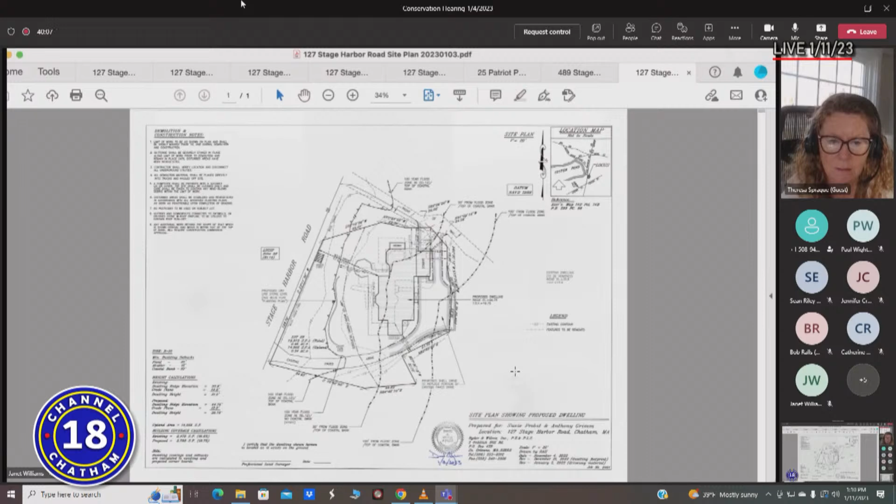I see that Theresa's there as well. Was the tree protection plan there before, or am I just not remembering it? No, I think that was recently submitted with the revised plan from Theresa. Okay. All right, correct. And unfortunately, I didn't make a copy of that, but you should have it. Yeah, we have it. It's in our stuff. All right, anybody have...

I'm just curious, Russ, I was looking to see where the shrinkage in the footprint of the house happens. When you look at the plan, you see where the areaway is on the north side of the house and the bay window or the angled portion. Oh, the cutoff there, yep. It extended towards Stage Harbor about 3 more feet originally. So they took 3 feet off of that and reduced that wall. So the north face wall was reduced by about 3 feet.

What's an areaway, by the way? Areaway. Yeah, it's just probably a concrete foundation, 8-inch wall that's going to have windows. So there'll be windows down there for either egress or for letting light into the basement. Okay. Well, I don't see any hands up right now. Are there any, all right. You want to ask about that?

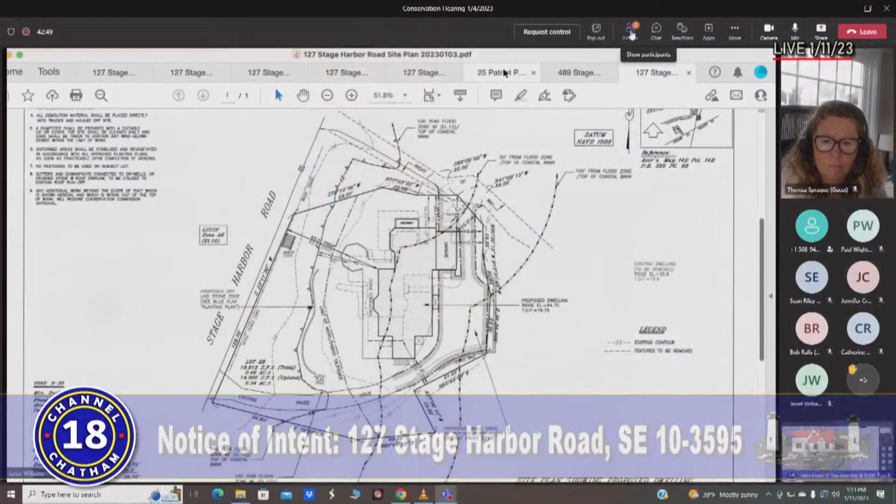My recollection is that their concerns are about the driveway. Yes. So if there are changes there, it wouldn't affect too much of what we are dealing with here today. No, some of the suggestions, for instance, he suggested moving the garage to the south of the building, which wouldn't be very practical. And then moving the whole dwelling to the south, and in so doing, purchasing or doing a land swap so that it would conform to setback regulations. And again, that's something that's a little bit extreme, but should be discussed, I guess. Okay, well, actually, we have a hand up, I'm assuming, from an abutter. So go ahead, Mr. Preston, you want to?

Can you hear me? Yes. Okay, thank you. Good afternoon.

My name is David Preston. I'm an abutter at 117 Stage Harbor Road, where I've been for almost 40 years. The properties at 115, 117, 125, and 127 are really a neighborhood, and it is worthwhile looking at projects on individual properties from a neighborhood perspective. We are a neighborhood because of a number of inescapable characteristics.

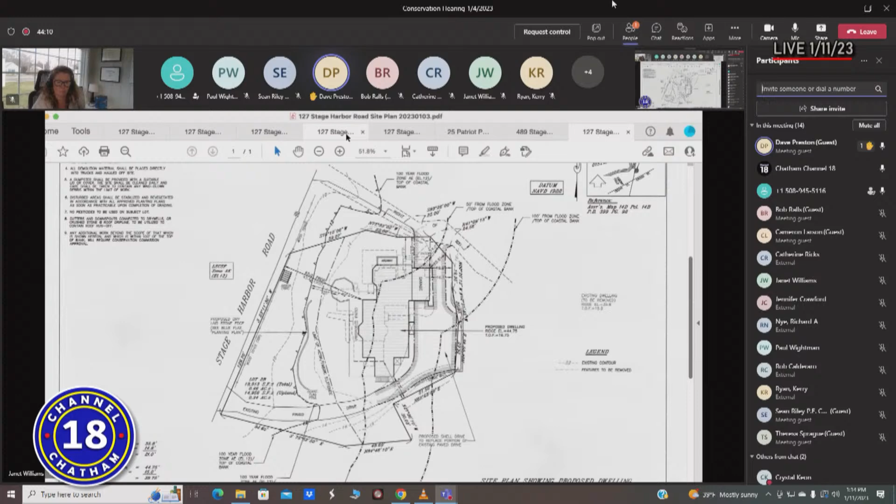The first is closeness. The four properties are on what is a relatively small piece of land, if any of you have been there. 115 and 127, for example, are less than 30 feet apart, with a roadway in between. The second characteristic has to do with the linden trees. Each property has one, and they give the community a special look that we all value. We at 115 and 117 have yearly care routines to keep them healthy and looking attractive.

A couple of years ago, we spent 18 grand ensuring that the big one beside the right-of-way on the property would survive. The third item that links us together is the right-of-way. That is the only way that three of the abutters can access the property or walk to the beach. The property at 127, in addition to the use of the right-of-way, has access to Stage Harbor Road by its own driveway and to the beach at present via the pathway under the arbor.

With that background, let me get to my question. I think you see that we are neighbors, not really by choice, but also by necessity. With the 127 Stage Harbor project, the new house is situated about 4 feet to the south of the old one. And as abutters at 115 and 117, we do appreciate that very much.

Given the space to the south on the 127 Stage Harbor property, would moving the house a few feet more to the south be something in terms of protecting the root system of the trees? It also would add to the privacy of the property of 115 and even to the property at 127 vis-a-vis the right-of-way. That is my question. Thank you. Thank you, Mr. Preston.

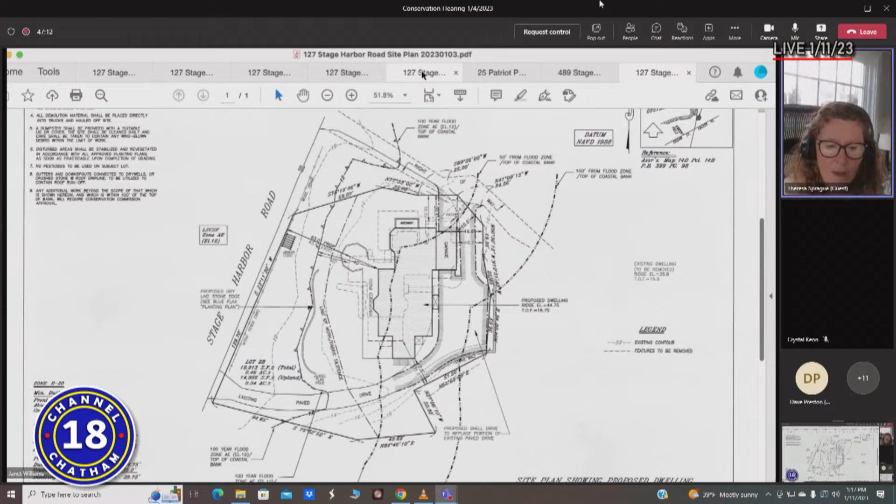Thank you. Through the chair, Theresa Sprague with Blue Flax Design. We did submit an extensive tree protection plan along with the updated planting plan, which shows the permeable driveway. I just want to reiterate what I stated at the first hearing. Our first direction from the property owners was to protect that linden tree and the English elm trees that are located along Stage Harbor Road. We all recognize the significance of these trees and the importance of the character of the neighborhood

that these trees support. With that, we've submitted an extensive management plan to protect that linden tree, both short-term during construction and long-term. And I know that the property owners are committed to that plan. In addition, moving that north wall 3 feet further to the south obviously helps us better protect that linden tree. The existing structure is virtually right up against that tree with existing brick patio over that root system.

As part of our tree protection plan, which was created by a certified arborist, we're proposing to leave that brick patio in place while the construction begins, and then to hand remove that existing brick patio after, and then support the health of that tree through protective pruning, through monitoring, through irrigation, et cetera. So that tree protection plan is available, and we'd be happy to share that with any of the abutters. And I believe it is on MyTownGov. Yes, it is as well. It should be, so anyone can download it and take a look at it. Yes.

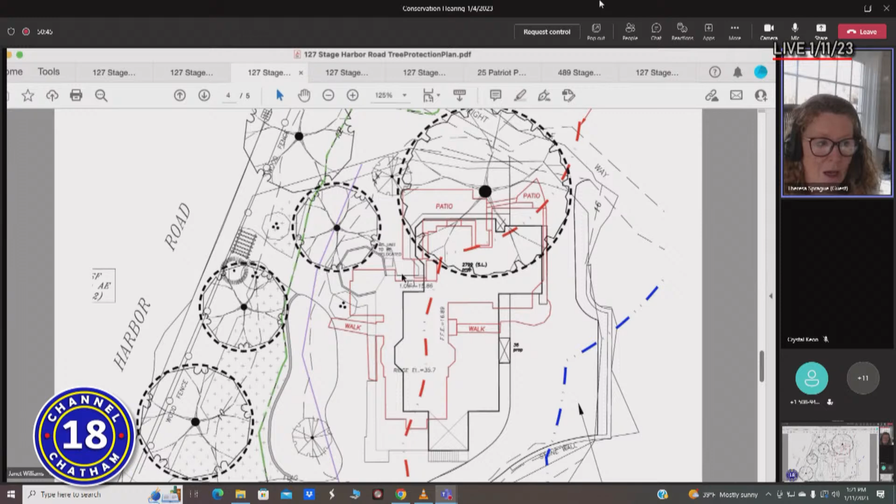We've provided 3 different options for protecting the tree during construction, and obviously we would want to consult with the contractor to use the method that's going to best protect the tree with the methodology for deconstruction. So we're hoping that this tree protection plan will become part of the order of conditions, and that we'll have an opportunity to work directly with the contractor to make sure that tree is protected. In addition, we've provided pre-construction, construction, and post-construction guidelines for protecting the tree. Thank you.

So as I've read your tree protection plan, the idea is that you would have someone there, yourself or a representative, often during the deconstruction and construction. Exactly, through the entire process, from pre-construction through post-construction. Right. Yes. So, Mr. Preston, do you have other comments, questions? I will assume no. Okay. Other questions from anyone? I mean, this is certainly one of the more detailed tree protection plans. Yes, I did have one final. Okay, go ahead.

It had to do with the arbor and the path under the arbor. The arbor, while not always in great condition, is somewhat attractive. And as you look at the property as a whole, it is very consistent with Chatham streetscape. The loss of the path also puts more pressure on the right-of-way for beach access. Why does the arbor have to go as opposed to remaining as a nice and attractive piece of our Chatham heritage? Retaining the path keeps the families who rent the property at 127 off the right-of-way, where they sometimes get into trouble with traffic.

So again, I can answer that. The existing path is to be maintained. The arbor is in poor condition, as you pointed out, and so that's why we're proposing to remove it. The property owners are trying to minimize the amount of maintenance required on the site, so they did not ask us to put an arbor back. Certainly that's something we could discuss with them, but we're simply proposing to remove that arbor because it's in very poor condition. It can't be maintained.

A new arbor would have to be constructed. And the homeowners were considering whether to put an arbor back. They were thinking about the maintenance required to take care of it and make sure it doesn't get into the condition the existing arbor is in, but that path is being maintained. So it will just be a grass path that will lead them out to Stage Harbor Road and then across to the beach. Thank you. Thank you.

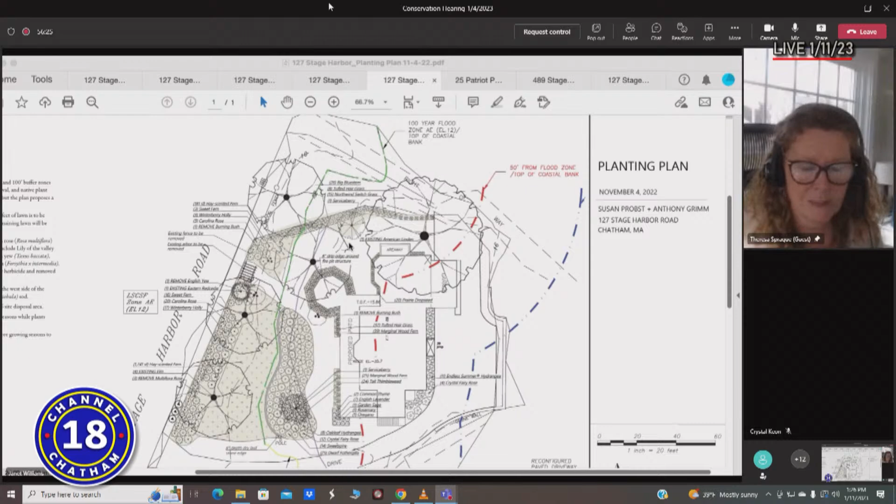Anyone else? Okay, it sounds like not. So, it sounds to me like we don't have any significant issues with the plan as proposed. You still have to go to the zoning. It sounds like you still may have a conversation with the abutters for some change, which will be handled through zoning, probably. Right, right. So, do they have to come back if the house is moved 2 feet?

I don't know. I mean, if you did move the house some small distance, I guess, up to 2 feet, it strikes me that the overall mitigation plan wouldn't change much. No. You decrease the 0 to 50 by a small amount, but the mitigation being proposed remains the same. Right. So any changes therein could be reflected to us in just an updated planting plan, I guess, site plan. Insignificant, yes. It wouldn't necessarily affect what we would then write an order for.

And one of the issues, not only due to the setback, but one of the issues about moving the house to the south is you have an existing driveway that in that area closest to the house will probably maintain pretty much the same configuration, because across the other side of the driveway is a retaining wall that's going to remain. So we can't narrow the driveway necessarily. So chances of it moving are somewhat small in your view? Yes, I would think. Just through the constraints. Okay. Is there any reason, anybody have a reason for us not to send this to an order as proposed? All right.

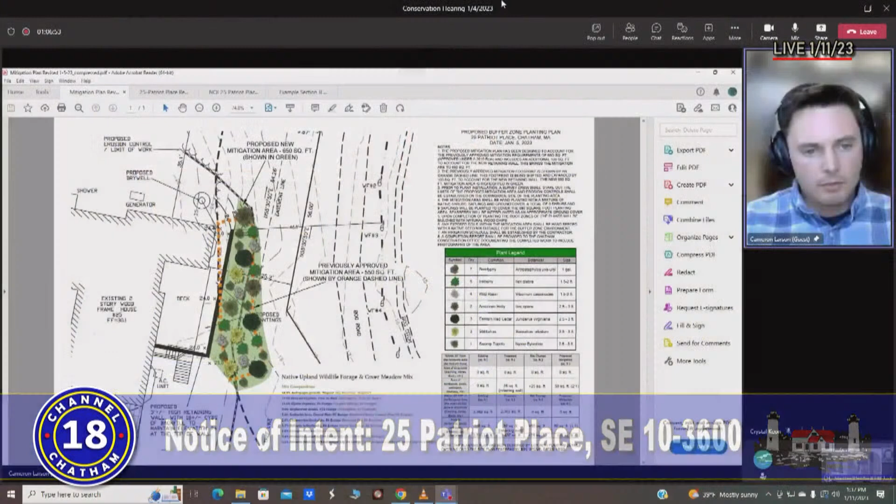All right, so that planting plan should be back up. So that entire green highlighted area is the proposed mitigation area. It's 650 square feet. And what you're seeing over here is the plant legend that indicates a mix of native shrubs and saplings. So we have 6, 7, 8, 9 saplings and 9 shrubs, and then 7 bearberries to also go in to improve the herbaceous layer.

So beside the swamp tupelo that's outside on the south part, outside the orange dotted line, what else did you add besides grass to make it 100 square feet of mitigation? We added 3 additional saplings and 3 additional shrubs from what was previously approved. This plan is just a depiction. The way the plants are laid out is kind of just in a random fashion on the plan. It doesn't reflect exactly what was added in certain areas beyond that orange. But we did increase it by 3 shrubs and 3 saplings to account for the 100 square feet.

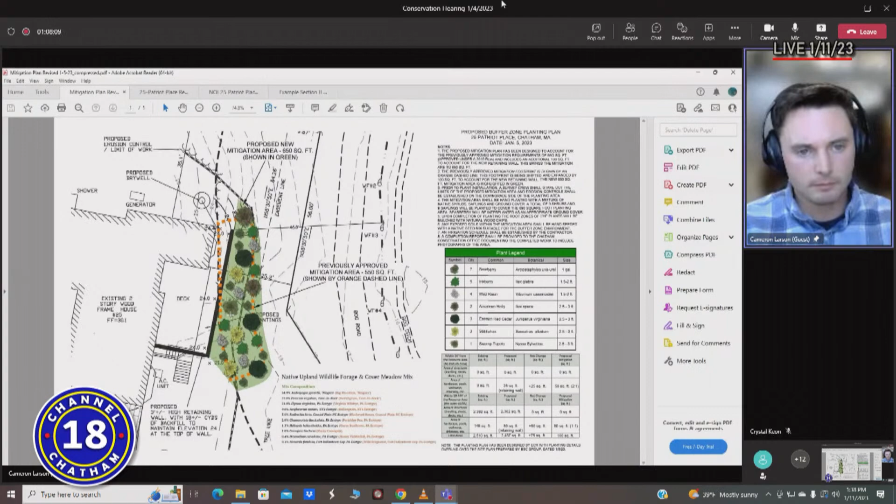Okay, and then on the plan, inside the retaining wall on the side of the deck, last time we were talking about, you said it's supposed to be sort of a walkway, but there's also proposed plantings. Can you address that? Yeah, you can see it a little bit better here. So that's just a notation. The applicant wanted to have the ability to add some native plantings along the top of the wall if they'd like. I do know what you're saying. It's a narrow area, so they're going to have to leave enough room for walking by there. So it was just something we wanted to cover in this application if they wanted to pursue any plantings in that area.

But that's aside from the mitigation. That's not included in our mitigation calculations. And at that time, if they want to, they'll come to the commission and tell them what they want to add? How we basically spelled it out in the narrative part of the application was that there'll be native plantings in that area that will be pulled from the town's approved list. If you need additional approval beyond that, we can certainly give you notification or send you the exact plants that are going to be there. But again, they more or less just wanted the ability to add some native plantings there if they so wanted to.

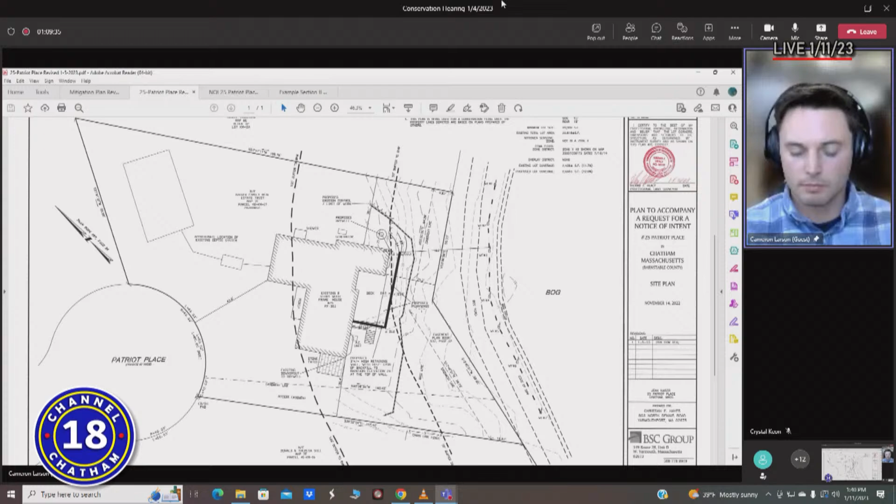I guess I leave that up to the whole group. Is that something that would need approval at that time? If they decide they want to put in native plantings on top of the wall, wouldn't they need to come see the commission? They could probably notify the agent. You can put in the order that any ornamental plants that are installed are native and approved by the agent. Yeah, we can add a condition. I just wanted to make sure that we handle it through the agent. Yep, that's not a problem. We can certainly notify the agent of the plants that are going in.

Okay, thank you. Anyone else? Just got a quick something. So the bare areas on that slope will be planted, correct? And mulch? Correct. Okay, that's all I had, thanks. Okay. Sounds like that's it.

You probably want to go to the next earliest work session, don't you? Ideally, yeah. I thought so. Rhetorical question. We're going to have to cut it off at some point. This will put us to 11. That's a lot. So you may be the last one in. Everybody else can sort of prepare their arguments. All right, we appreciate that.

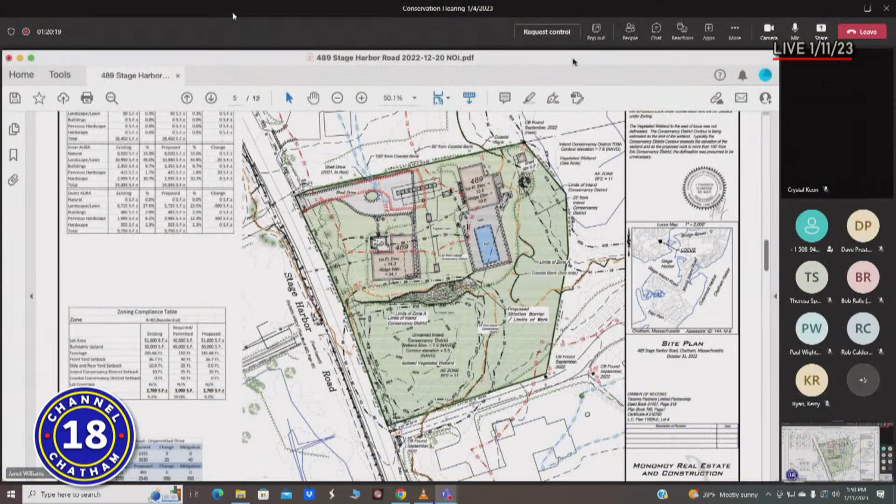Anyone else here? There's 2 mitigation areas, right? Isn't there a little one up at the top? Yes, out in the back corner by the shed. Is there a reason for that? It was just a good spot for it. Okay. Out in the wetland, down the big one on the south, there are green stakes out in the middle of it. Is that part of the delineation of the wetland, that's what that was? I believe so. Okay. Typically, those green stakes we're seeing as mitigation delineations, but I was a little confused there.

One thing that has occurred to me when we talk about mitigation areas that are adjacent to what I call a tsunami of invasives, or sea of invasives, is whether or not the mitigation plants would be better off being trees. Because the invasives have a harder time covering up a tree than they do a shrub. Until you get into porcelainberry and the other climbers that go right up. They go right up, but all you have to do is go there with your clippers and you kill it. And it doesn't require a lot of muscle power to take care of invasives in a tree if you stay on it.

Now, there were 3 trees out there that will remain, that they had planted at one point in time. Yeah, the 3 birches. And I do see, I think you're planting, let me just take a look, there's a black oak that's in the area by the shed. Yeah, you're planting one tree, basically. Yes. So that was the only thing that occurred to me, and this is actually sort of a new thought for me, because we get this all the time now, where we're next to all these invasives. What can we do besides a mow strip? I personally don't have a lot of faith in mow strips.

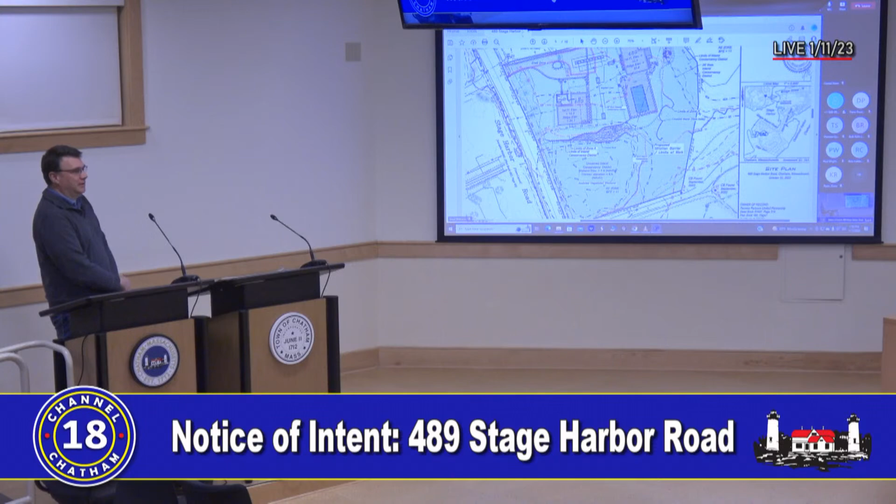There are the 3 trees that exist here, and it does no benefit to plant trees too close to each other. I agree. All right. So this is just something I'm sort of tossing out there for future reference, but I'm going to be bringing this up in other similar cases. In this particular case, I accept your argument. Anything else for me or anybody else?

So we need to send this to order conditions before he changes his mind and wants to go to January 25th. I'm sorry, did you say go to January? No, February. February would be great, because then they can get in there in March and start the planting. It works out well for you and us. All right. February 22nd, okay.

I'll make a motion that we continue 489 Stage Harbor Road to the work session on February 22nd, 2023, for an order of conditions. Second. Roll call vote, Bob. Aye. Janet. Aye. Karen. Aye. Lise. Aye. Cheryl. Aye. And I vote aye. Thank you, Thad.

Very good. Oh, boy, okay. Yeah, fun.

Up next, Mr. Chairman, is 299 Cranberry Lane, Timothy F. Ryan, map 15K, parcel 7-7, SE number 10-3594. Project is redevelopment of property, new house, guest house, septic, sports court, and land management plan. You again. Alrighty, me again.

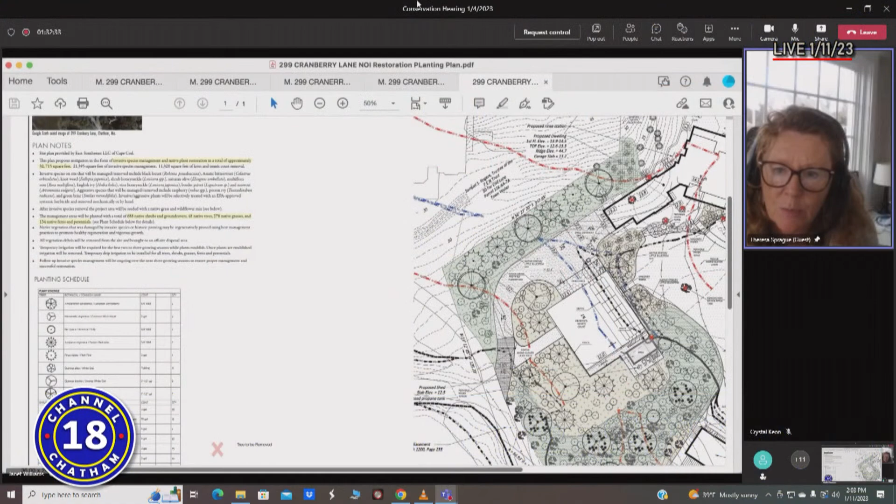Yeah, there's a lot to like about the project, obviously. There's a tremendous amount of mitigation going in. At the site visit, Theresa, you were up there with tape because you realized some additional trees had to come out relative to the plan we're looking at. I believe there was one tree that was not shown on the site plan that I marked. The other tape was on trees that are already marked for removal on the site plan that I just flagged to make it clear at the site visit, the exact trees they were.

So there were the 2 cedar trees, an oak tree, and a pitch pine in the layout of the garage. And I think there was one tree in the area where the driveway wall may go that was questionable. It's not shown on the site plan, and I believe I flagged it, but the flagging was done on trees that are already marked for removal. Right. So do we need an updated site plan showing where the actual retaining wall will be going in? Or is this accurate?

That's accurate. I just want to double check that we've located the trees in question, both the trees on what I call the back end of the bank, as well as this retaining wall, because when we were there, it wasn't obvious to some of us. We were trying to follow on the plan where that retaining wall went, and we just weren't really following it. So I didn't know if that meant it wasn't completely laid out on the plan or not. Oh, it was, we just didn't get the points to the crew to stake it. It just wasn't staked enough. Okay, so we couldn't see it that way.

The only thing that is an issue for me is that you are cutting into what is essentially pretty pristine, tell me if I'm wrong, Theresa, habitat on that hill where the retaining wall is going. Anyway, go ahead.

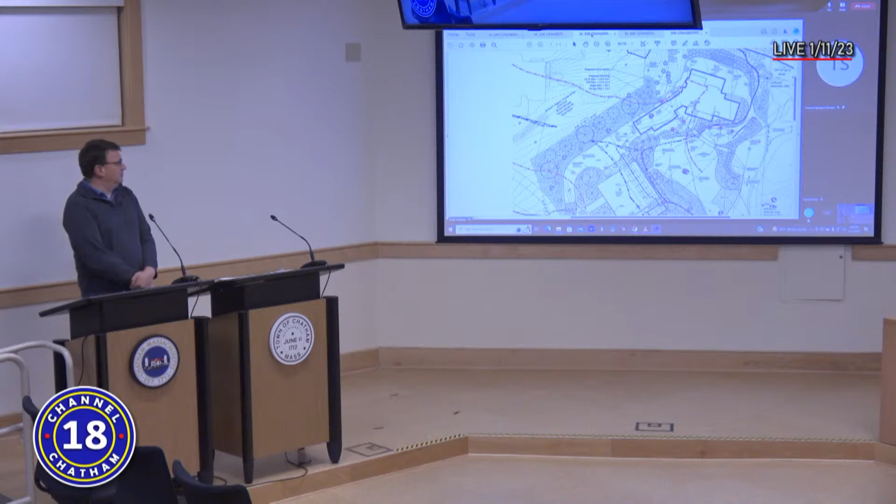Good afternoon, Paul Muldoon, Muldoon Architects. We were fairly strategic on the placement there, knowing that we're cutting into that bank a little bit and utilizing the foundation wall of the structure to support some of that grade. That swath between the 50s there was strategic. We're trying to place it in that area where we're between the 50 and the 100, of course steering clear of the floodplain.

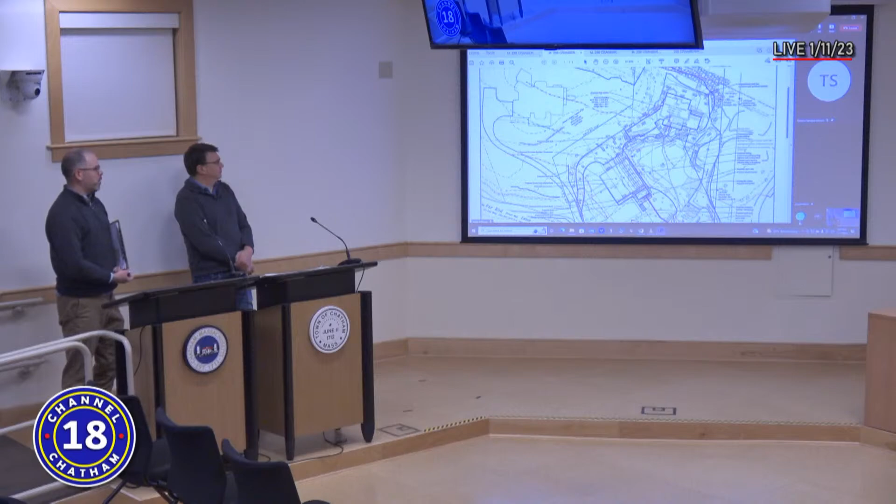Can we push it further south? To some degree, yes. There's no reason why we can't. Substantial movement means substantial change. If we said 18 inches, is that substantial enough? I don't know. 36 inches? I'd have to go back out there and stare at it with that in mind, but, as I said, it appears to be pristine habitat. I don't know how much you could move it in order for me not to feel queasy about it, but any amount you could do, obviously, is to the good. Sure. How important it is, I'll let my colleagues opine on that.

But overall, the rest of the project, and this is another one of those projects where not that much mitigation is required. A lot is being offered. That's understood, appreciated, and so there's not a lot we can whine about with that in perspective. But I am going to whine about that particular thing. So other than that, and I'll let others here tell me whether or not I'm just whining for no good reason. And that's really my only remaining concern. Anybody have any thoughts on that? Rush, go ahead. Okay. You'll bite? I'll join you in

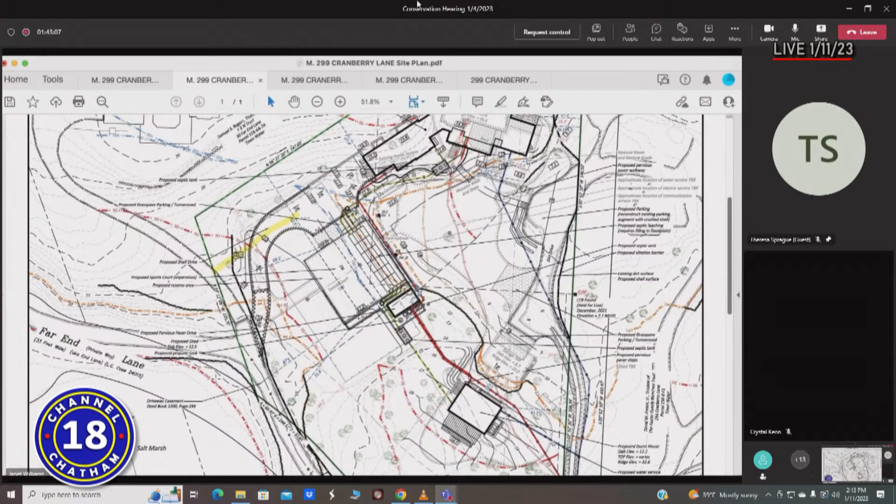So while the neighbor has an easement over the subject property, the Ryans do not have an easement over the neighbor's property. So we couldn't make it all the way up to here to get back to there. So it's coming in from their property. Where's the property line? The property line is in green here. Okay. The road isn't necessarily within the road layout. If you were to scroll down a bit further, you can see that the dirt road is within the road layout, and then it deviates out of the road layout. Back in the day when they would draw it without knowing where the wetland was exactly.

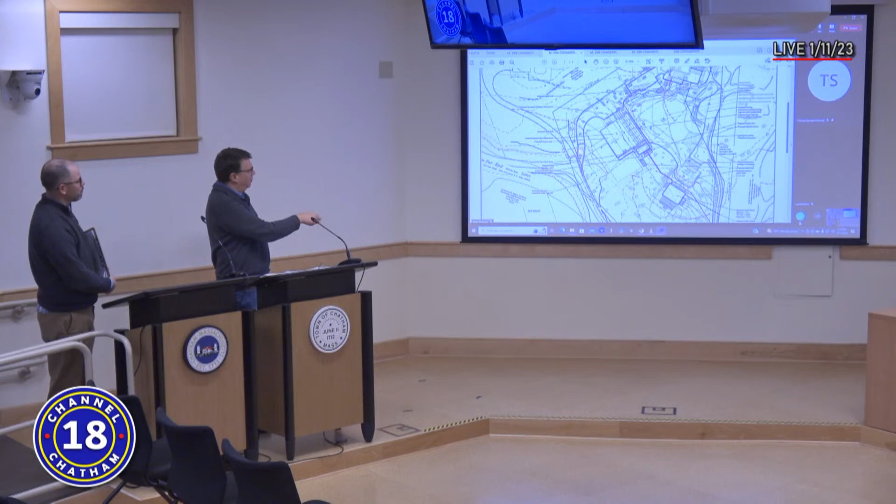But I still am looking at it thinking, within that green property line, you could still start the new driveway further up and reduce the square footage impact. We can certainly review that. I'd want to review that with the neighbor first. There's a change in the material, and we were avoiding intruding upon their space. Okay, I would like to just ask that, because it could cut the impact coverage area significantly if it were shortened up. Sure.

The other thing that struck me about this area, along with the grass pave over here, and a parking area here, is by my count, this area in the new driveway is designed for 5 cars, this is what the narrative says. A quick gauge of the ruler was telling me that the area over here, proposed parking, would hold about 5 cars. These grass paves look like they would hold about 4 or 5 cars. So I'm adding it up and thinking you're providing parking for 15 to 20 cars.

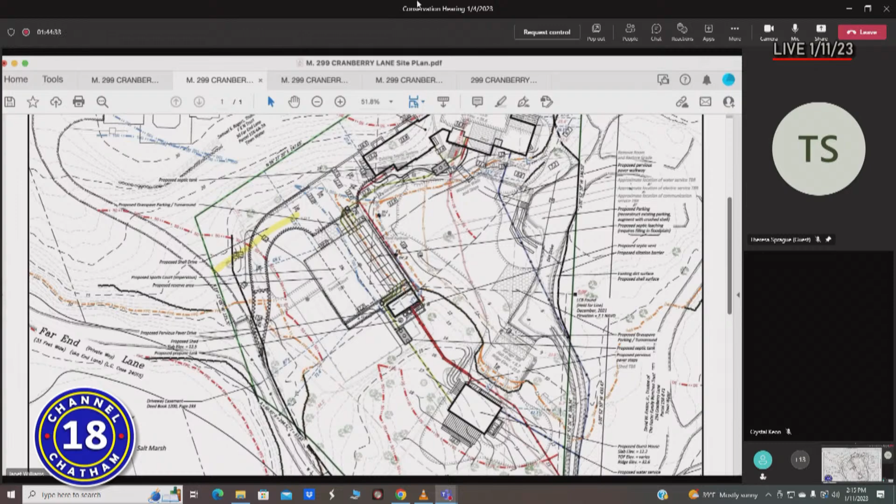Almost. So in order to be able to get through here and turn around, you can really only fit 2 cars in here. And the purpose of the grass pave is to enable larger vehicles to be able to turn around. So it wasn't intended for parking. It says parking though. That's what got my attention, was looking at the number of times the word parking was appearing on the plan. Sure. Parking / turnaround.

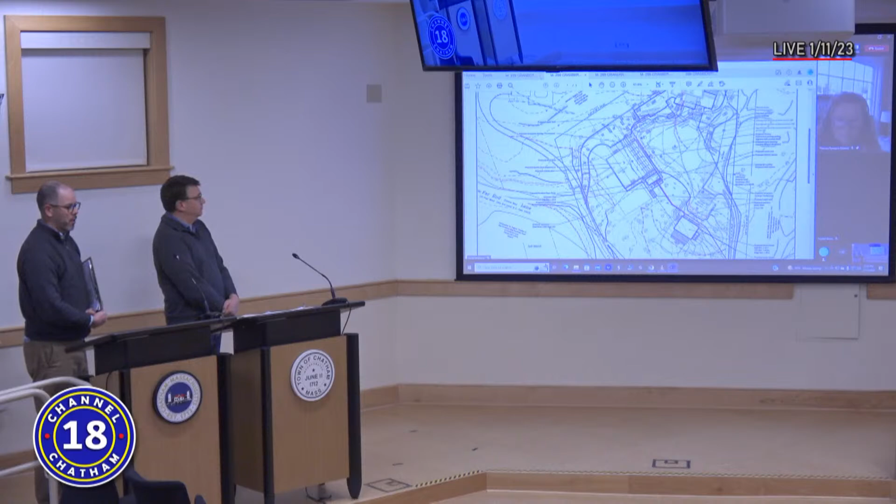The grass pave was also in response to neighborhood discussion about the loop coming down Cranberry and minimizing the opportunity for cars to continue on to the neighboring property and work themselves around. So with this on our property, we can have Amazon trucks and landscape trucks and life safety trucks back into this grass pave and then pull out on the property rather than pull around the bend on the sand. That was a very strategic conversation we had with our abutter there, trying to minimize the activity going up and onto their property.

I appreciate that. I just think that another look at the amount of parking, and maybe not so much the grass pave; the grass pave areas don't bother me. I do understand the need for larger delivery trucks. I think I'm most concerned about the parking off the new driveway.

Maybe some of that can be decreased a bit. Oh, sure. Okay. There's just an awful lot of parking. The area around the new garage, we have a one-bay garage there. Right. So it's one car directly in, needing the space to turn and pull out.

So we're expecting the Ryans, Tim and Carrie, this is their primary residence in the near future. And they'll be parking there, and for 2 cars to be in that area and be able to back out onto that grass pave and pull out onto Far End Lane, that works. If we have 2 more cars in there, it doesn't work, and cars will be backing out onto Far End Lane. So we're trying to reserve enough space for a car in the driveway.

Oh, okay, I'm sorry. I see the grass pave marked here. I guess I was looking at this area where it's bumped out in front of the grass pave, so there's even more. I understand that this design allows for maximum flexibility and usability, but it is within resource areas. Understood. I'm just asking that another look be made to see if some of that can be decreased a bit.

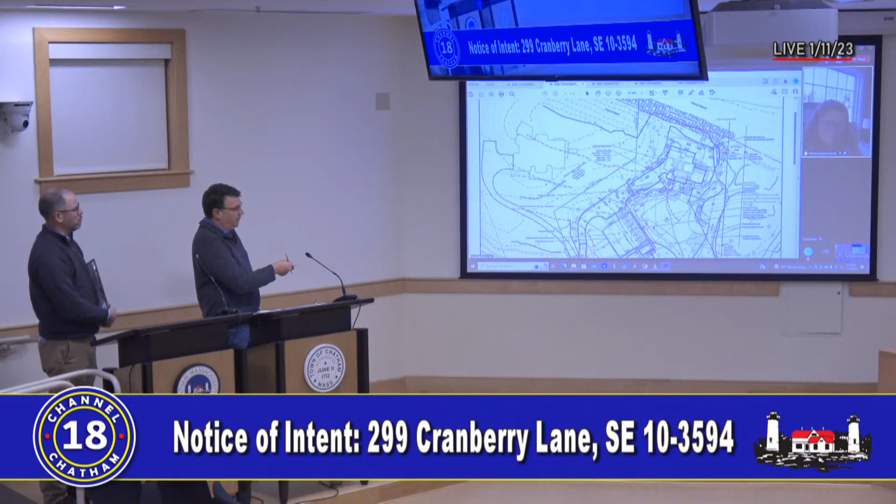I thought when we were out there, we were sort of saying that we believe it used to be almost flat, so that's why I was asking, because below that hill is very flat. So that's why I was asking. Is that it, Karen? Yeah. Okay. Thanks. Theresa, you have your hand up.

Thank you. I just wanted to speak to Janet's statement regarding the parking. This home previously has been a rental. And when I was out there during the summer, what I was witnessing was exactly what we saw when we were all parking on the site for our on-site visit. And that is that cars are parking everywhere. They're currently parking up on the slope to the front lawn. They're parking in multiple different areas.

So I think that this is an improvement in that it really directs where the parking is going to be, where currently everybody's sort of parking willy-nilly, for lack of a better phrase, mainly in the area where we're showing the proposed Grasspave parking turnaround on the eastern side of the driveway near the proposed new garage. Right now, everybody is just kind of pulling in and parking up on that lawn, parking up in other areas.

One of the things we were considering when we proposed the Grasspave is just the fact that this is temporary, so for occasional overflow parking or the need for a larger vehicle to turn around, like a delivery truck, this would provide for that. But it's not long-term or permanent parking where people are regularly parking. So those Grasspave areas would only be used in a situation where perhaps there's a family gathering and extra family members are going to be there. Otherwise, they'll remain as Cape Cod lawn and won't be regularly parked on and used.

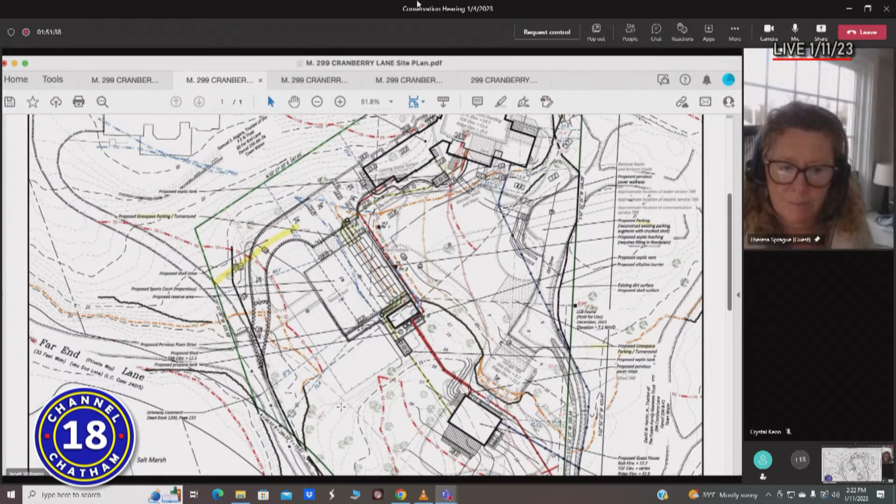So I think this plan actually consolidates the parking, where currently parking on this site has just been wherever somebody can find a spot to pull in, which is what we experienced on Monday. Thanks. I parked there.

All right. Bob Moore, go ahead. Got a few more, Theresa. I know the neighbors were concerned with lighting, and you mentioned that step up to the new court will be lit. Any other areas that will be lit? The other areas that would be lit are just the walkway, so the stairs going up to the main walkway into the house. So we'd want just some footpath lighting, so down-facing lighting just to provide safe access, footpath to walk up the stairs, up the walkway, and then into the patio.

I'll let Paul answer regarding any front entry lighting. We haven't discussed that. Paul may have designed that. I did want to make sure the neighbors understood there would be no uplighting, there will be no floodlighting on this site. Obviously, we know the impact that lighting can have on wildlife. Our goal is to minimize that, but just allow for safe foot access through the walkways and step areas. And that's just low voltage lighting? Is that what that is? Low voltage, yep, exactly. Low voltage foot lighting, yes.

And architecturally on the structure, the garage door, there's a side door next to the garage door, which will have a light over the top. The rest of the lighting will be underneath a covered porch, both on the front entry side as we approach from that walkway. The front entry door is in that nook, so we'll have some lighting underneath that porch and over the door. And then on the north side of the house, the covered porch there will have recessed lighting as well. Okay, so it's not going to be like New York City then, correct? Absolutely not. What about the sports court? Is that going to be lit at all? None, besides walking path lighting at the stairs. Oh.

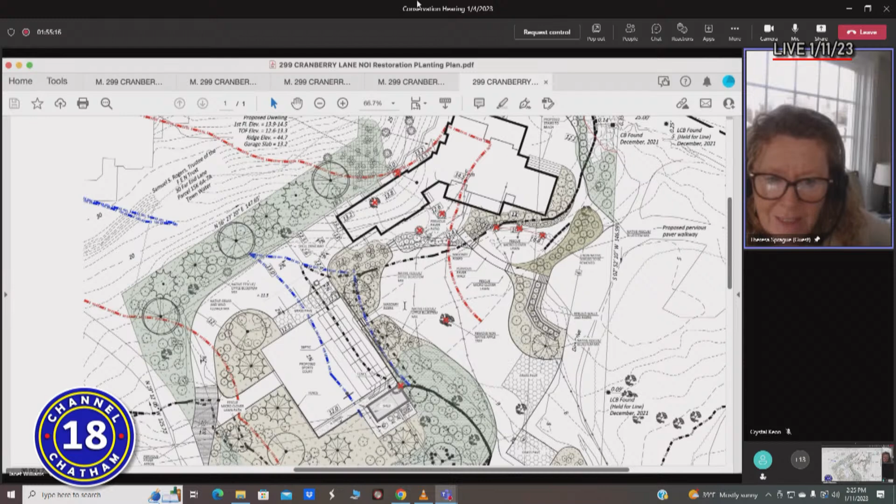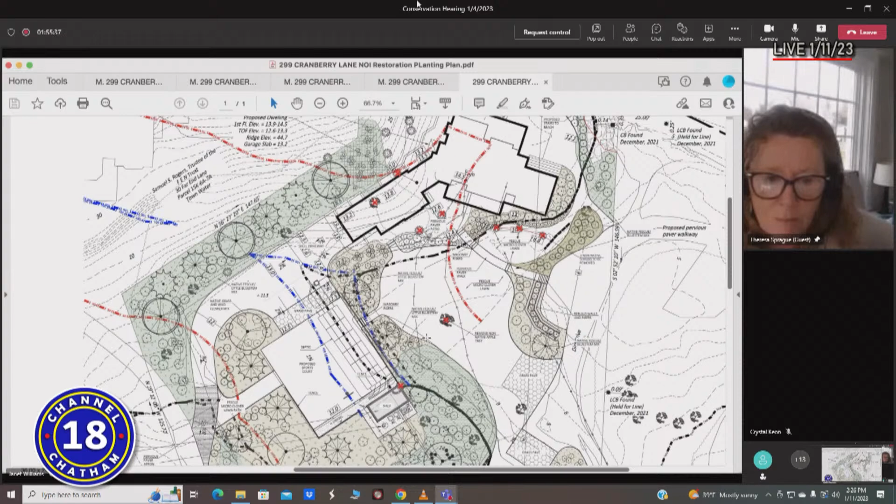But we've got a lot of woody vegetation that's directly abutting that Cape Cod lawn area that's between the sports court and the house. So I don't know that having that low fence will provide any additional protection, keeping mowers out of those areas. It can certainly be done. Maybe it's a belt and suspenders approach, but there's a lot of woody vegetation that's going back, a lot of bayberry, et cetera, that's either going to remain or be replanted. Okay. And we discussed no permanent irrigation again, correct? Correct. The existing irrigation system's coming out, no subsurface irrigation. Correct. Thank you.

Bob? Anyone else? So is it fair to characterize much of what we are talking about in terms of potential changes has to do with the driveway configurations? We'll be discussing that to see if there's anything that is feasible. I don't know what to do about that bank. I would ask you to take a look to see whether it really is just 18 inches or not. Well, if the updated stakes are there, it'll make it more clear in my eyes to see how much we're carving out. Right. And I'll try to get back out there as well, see if I can put my 2 cents in on that.

But anyway, other than that, I think we're making good progress here. Overall, from an environmental perspective, this strikes me as a plus. So we're just talking about the details at this point. Oh, I have a question. I'm Janet, sorry, just something else I noticed on the plan. Why is there a propane tank behind the bicycle shed? That's for the generator. Oh, okay, so the generator is propane. This one is. Okay.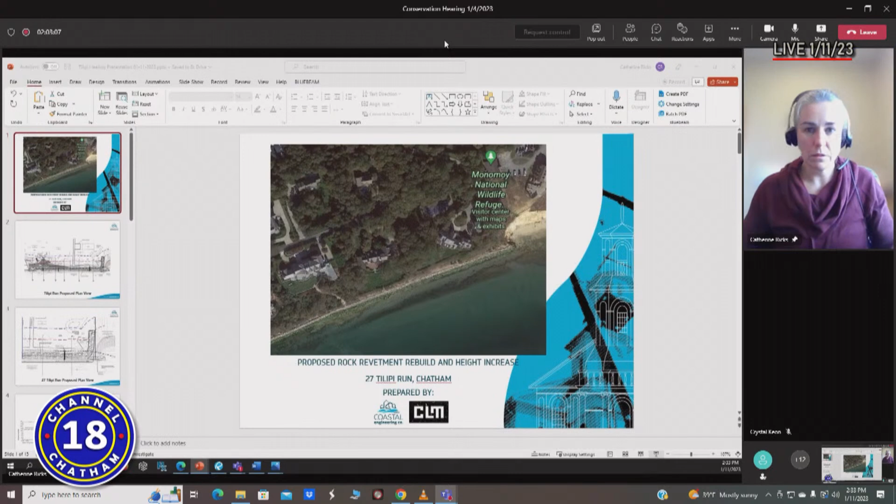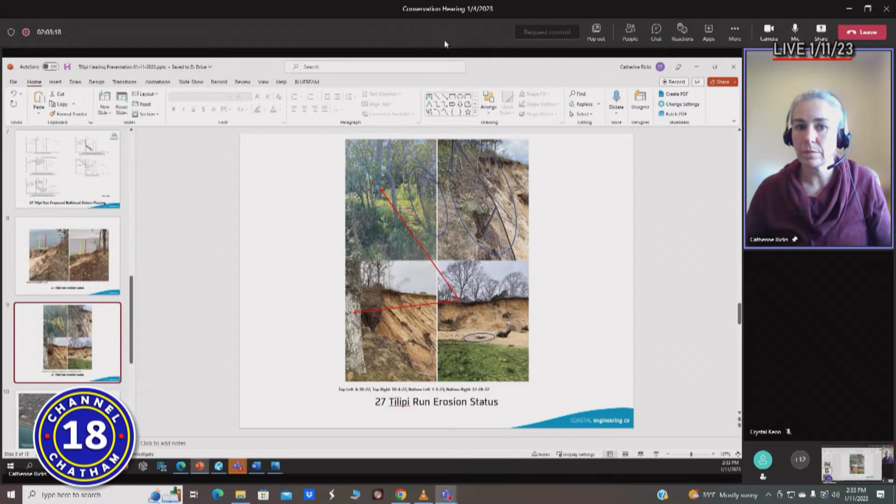Yep. I don't think we're seeing what you think we're seeing. We're seeing a faraway view. The cover page, I guess. Oh, is it not going? Huh, it's showing on my screen. I apologize. Let me see if, okay, I don't know why it did that. You just paged forward. I'll stop sharing then and I'll read. Okay. It actually was showing on my other screen. I apologize. Let's try this. Go back to it. Okay, so now it's showing. When I hit presentation, it didn't present on the correct page. So I'll go back lightly just to show.

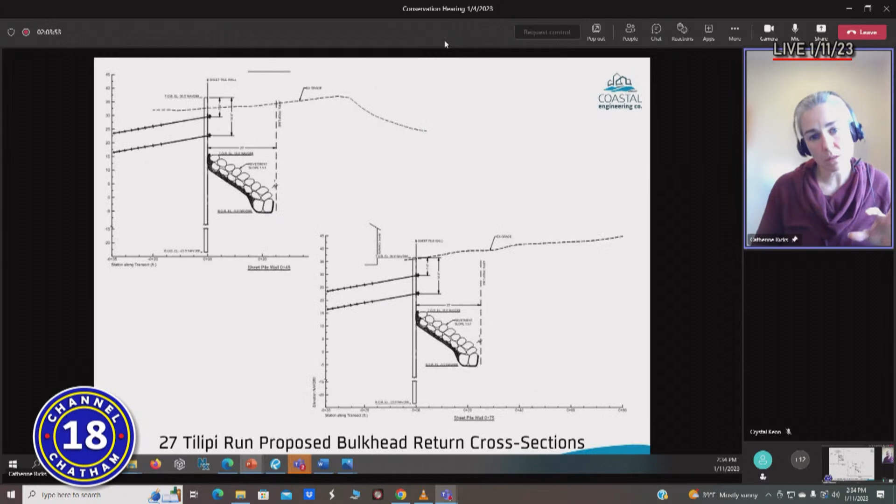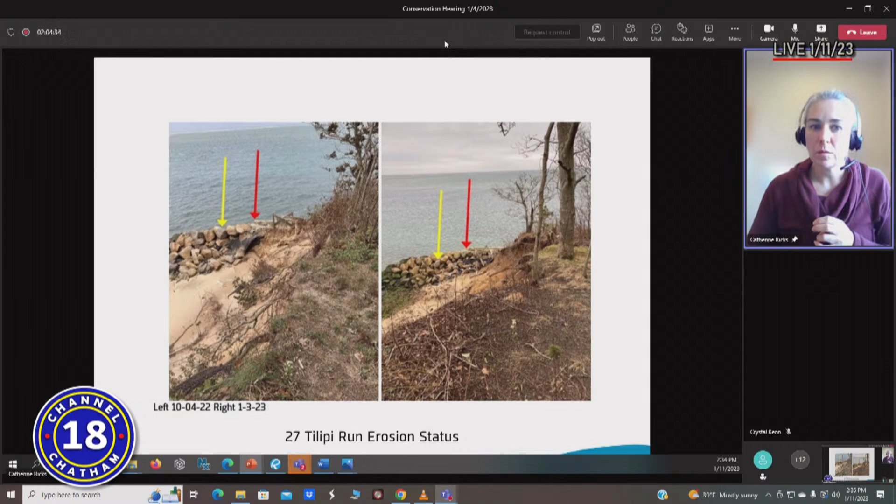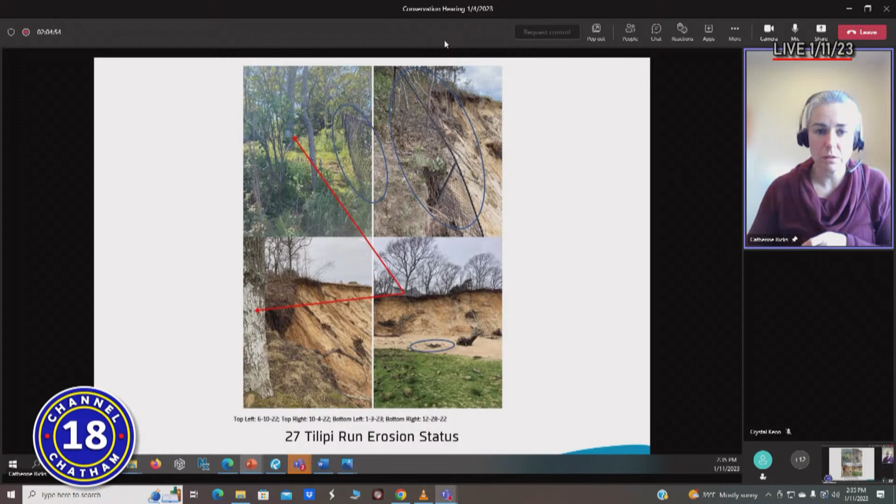And then these are the pictures. So I don't know if you've been out there recently, but the arrows are kind of showing the rocks and how they have fallen behind the revetment, and the timber from the stairs that is now very visible, which back, I think when we went out there maybe last March or April, was definitely covered with the sediment, as part of the bank. And here's where the fence was along the property line, and that tree that I'm pointing out in all 3 of the pictures, and then a portion of the fence I actually saw on the beach at this point. Yeah, so a lot has occurred.

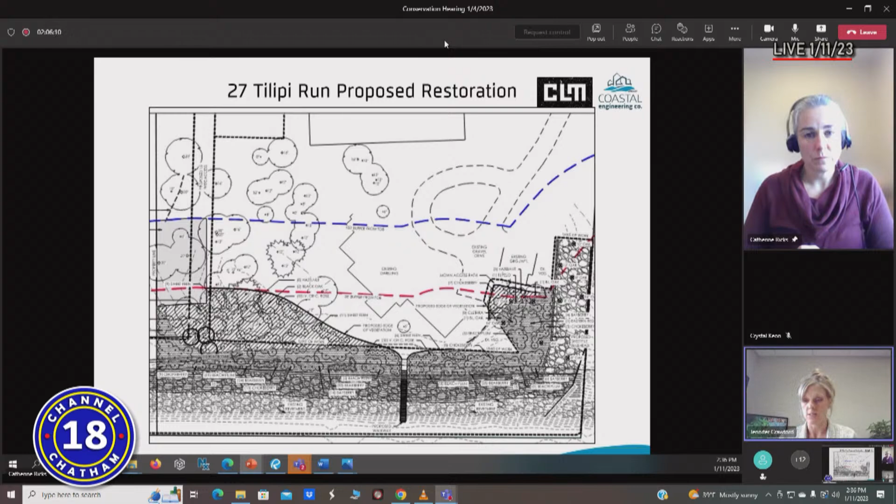Good afternoon, everyone. For the record, Jen Crawford from Crawford Land Management. So our restoration plan is actually fairly simple. The existing conditions, as I'm sure you know, there's a very narrow vegetated buffer strip right along the top of the bank that is all within the limit of work. So we are basically proposing to revegetate any existing naturalized areas that will be within the area of construction. And in addition to that, we are proposing over 4,800 square feet of mitigation in the form of lawn removal to increase that vegetated buffer strip from the top of the coastal bank.

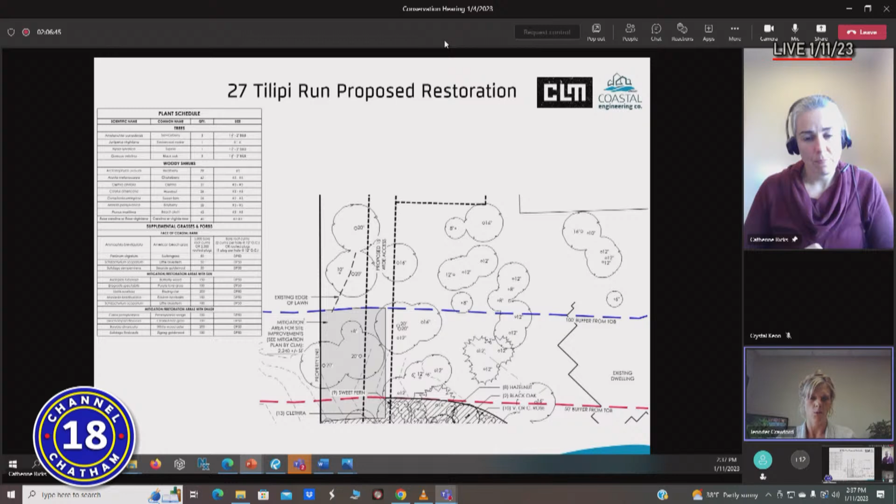Along with that, we are proposing to replant 10 trees and have a fairly extensive list of shrubs and grasses and forbs that will go in there. We try to locate those species accordingly with the site conditions. So of course the toughest ones growing on the upper face of the coastal bank above the new revetment. And as we get further inland, trying to incorporate a few more species to really increase that diversity list, but in a manner that we think is doable, so to speak, with the wind and salt spray that this particular site experiences. Like I said, our restoration and mitigation plan is actually pretty simple in nature, so I'm happy to answer any questions about it. All right, thank you, Jen.

So I'm just going to ask a background question. My recollection when we began all of this, which was some time ago now, when was it? It was a long time ago. March or April. Yeah. Early spring. I thought that the mitigation was being offered for all three properties at once. In other words, there was going to be mitigation, I think maybe it was on the far property, that would be covering work on this property. But now, whether or not I'm remembering that correctly, the point right now is that the mitigation being offered on this property is for the work on this property and not for work on any other property. Correct. The restoration plans for each property are individual, so each one is based on the impact from the revetment on that property. All right, if that wasn't the way it was before, then it makes it simpler. Okay.

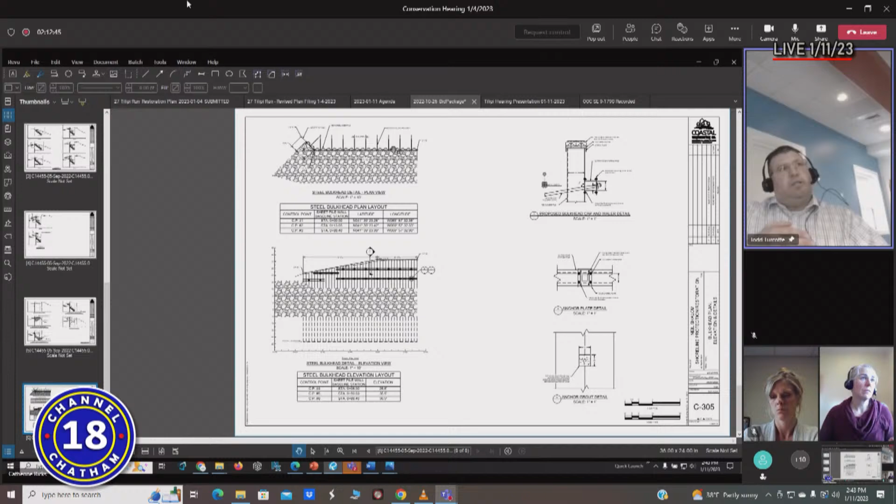So the steel sheets are interlocking sheets. They're a Z-shaped sheet of steel, and they interlock. Catherine, I don't know if you can bring up a detail if we have one that kind of shows that. But if I'm remembering this sheet correctly, each Z section is about 18 inches long. So when they're actually put in together as a U-shape, two sections put together, they're about 36 inches long. They install them as they go down the wall. So they'll install one sheet down to the depth. They'll put the interlock in and start driving the sheet in,

and continue going up to the end of the wall. So if you zoom into that plan view there, you can see a U-shaped set where you've got what we call a belly and a face of the sheet. Each one is its own unit. That Z section, where it goes from the knuckle to the knuckle, the middle piece to the other bottom middle piece, those are individual sheets. They're usually driven in a two-pair set. They get held by the driving hammer and installed into the ground. And as they get installed, they're 60 feet long. So they get installed basically to the existing grade, and then they continue on for that.

This particular sectional wall is 74 feet. I think there's a bend that is another 10 feet or so. So it's roughly 83 feet.

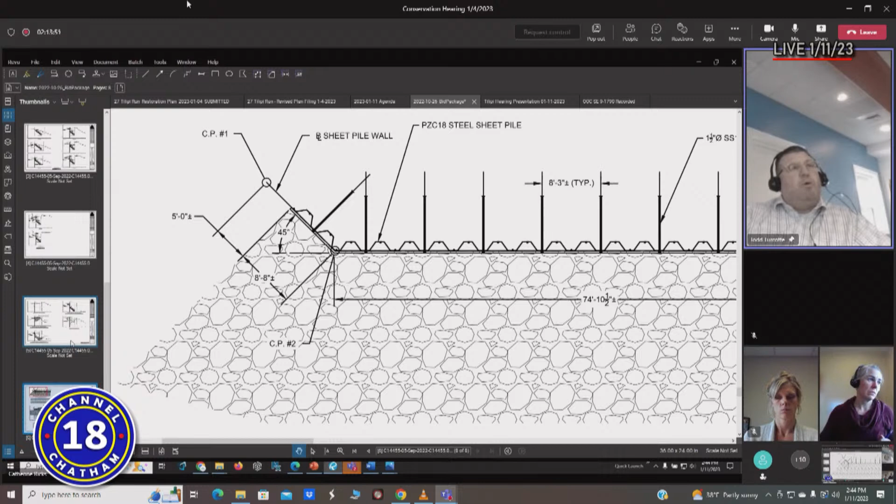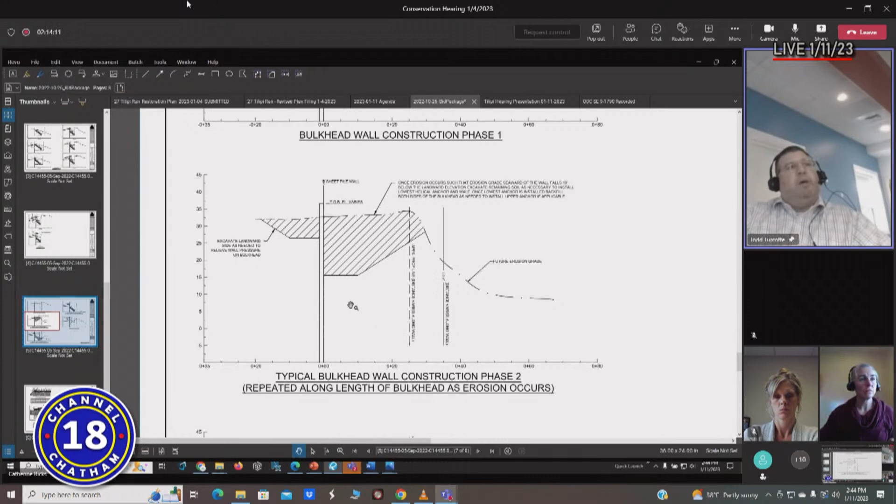So if you look at the cross-section, Catherine, on one of the phasing sheets would probably help. So the sheets are driven from above, and they're put in through the top surface and driven down, and then each one is interconnected. So you can see the big amount of excavation in front of the wall, the seaward side, we would have to do to even be able to install the anchors, because that exposed face of wall is 14 feet to the bottom anchor, and then another 7 feet down to the top of the revetment.

So if you go up to the phase 4, you can see how deep that ends up being. So that's why phasing it is so critical. Either that, or we're excavating out the bank in advance of nature doing its thing.

Well, that's what I was thinking as I was trying to envision how this is actually installed, is what are the risks of making the situation there even worse by all the activity involved with this, as you said, hammering these sheets into place. And all that work is done from behind the sheets, up on the bank, so behind the dwelling and the structures, so that we minimize the impact to the coastal bank, and that's why we don't want to excavate out early if we don't have to.

And as it continues to erode back towards the bulkhead, there is a point in time where contractors still need to be able to access it and be able to get a 10-foot wide working platform or 15-foot wide working platform down there to install the anchors. Now, the majority of the anchors can be installed from above, but you still need personnel to be able to cut out the sheet and do the face work that's on it. So the idea is to not disturb the coastal bank until absolutely necessary.

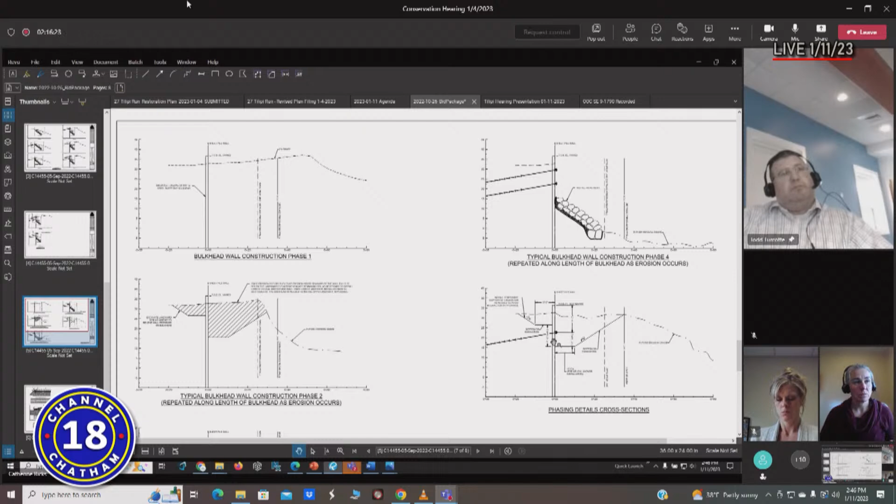So once you've completed all the phases and it's installed, what is the height from ground elevation to the top of the bulkhead? How much of it is? It varies along the section. So you can see here, this is starting out towards the shoreline, varying up because this line right here is the existing bank right there. So as the existing grade goes up, the bulkhead will go up. So it'll really just follow along with where it's going to be level with the existing ground in that area.

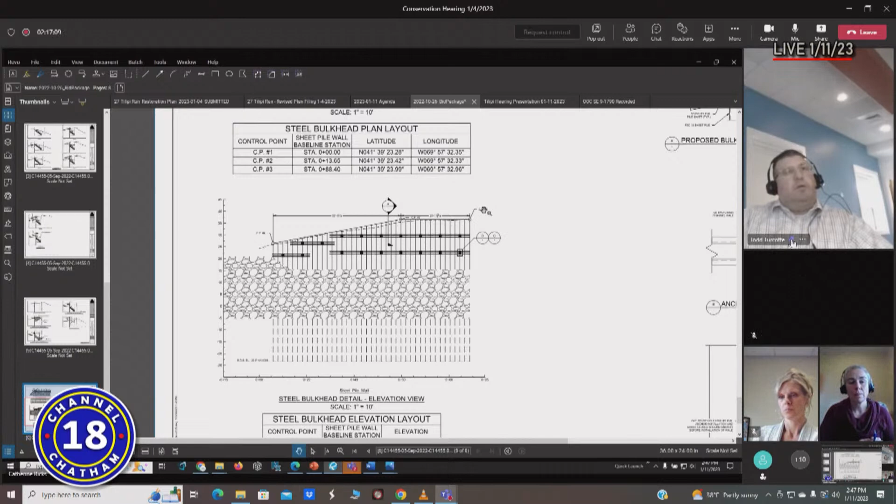And we're not trying to make this above what's existing behind it. So I think at this point it's at about 25 here, and then up at the top I believe it's 33 to 35 at this top point. So you said the design, the concept is to not exceed ground elevation. Correct. You can see the existing, we pretty much followed the existing, with just keeping a straight line, but following the existing terrain there. Okay, that's what I was trying to figure out, was whether it exceeded ground elevation.

And will you have a document or something, besides all of these good drawings, which are very helpful, a work protocol for the installation of this that has a narrative component to it? If that could be one of the conditions for the pre-construction meeting, just because depending on the contractor, you could get a different construction means and methods. They vary slightly. Right. That could be a condition within the permit that at the pre-construction, the contractor provide their means and methods. Yes, okay.

Okay, I have some other questions on mitigation, but I'm going to see if anybody else has questions on the revetment and bulkhead. Okay. I just have one question for Jen on the mitigation. I think it would be helpful to put something substantial enough to demarcate the buffer strip from the lawn. It'd probably be something for safety as well. Either a low single rail fence or some substantial rocks or something. What do you think?

I'm looking at the 1, 2, 3, 4, 5, 6 oaks that are Xed out. That's where the revetment is going in, so that's why. Eventually, yes. Including a 10-inch diameter, 16-inch, bunch of 8s. But on the other side, on the landward side of the bulkhead, in the restoration area, there are 4 more oaks. A 10 and 2/8, 14. So there's some pretty significant size oaks.

Hold up, are you talking about on the other side of the bulkhead? On the other side of the bulkhead, right in front of, yeah, the 4 that are listed there. Yep. A 14-inch, a 10-inch, and 2/8. So 6 where the revetment will be, those 6 I understand. But what is the rationale for removing these 4?

So, like I said, maybe they won't have to be removed. I'm not really sure because we do not have a contractor chosen for this part of the project yet, so not really knowing what their construction methodology will be.

Like I said, we just assumed that everything within the limit of work would need to be cleared in order for access and the work to take place. Maybe it wouldn't. I'm not sure. Catherine or Todd might be able to address that better than I can, so to speak. And also those tree locations, Janet, just so you know, they are approximate because they weren't surveyed. So we kind of dotted them in the field just so we could get some semblance of an accurate count for you, so to speak.

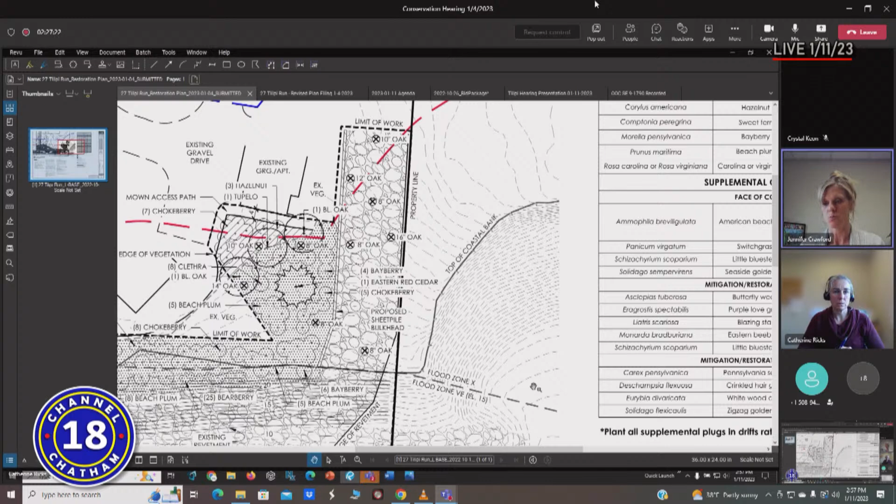I think that would make sense to keep the project accurate, so to speak. That makes sense to me. Okay. Figure out how to word that, but that sounds like a way to resolve it. Okay. Thank you. Yep. All right, I don't see any other hands.

I do have a question or comment about the overall site plan on your plan. I know you're adding that for context, but I'm a little queasy about having that in here. We approve the plan for 27, but by inference, I'm a little leery of having the overall. Yeah, because we haven't updated the other ones. If you wanted, we can submit a new plan that would just not include this front sheet. I think that would be the right thing to do. Yes, to remove it, because we are currently updating the other ones. So yes, we can definitely redo our set so it would not include that overall and just include 27.

Right, and when you're doing that, I think I mentioned this before, but I'll say it again. Would you please make it clear which property, the addresses for the properties, because I don't see it on these, and also make the property lines bigger. Yes. When we submitted this, unfortunately, the property lines were turned off in this most recent set. I see. Previous sets had the property lines. This one, it was turned off.

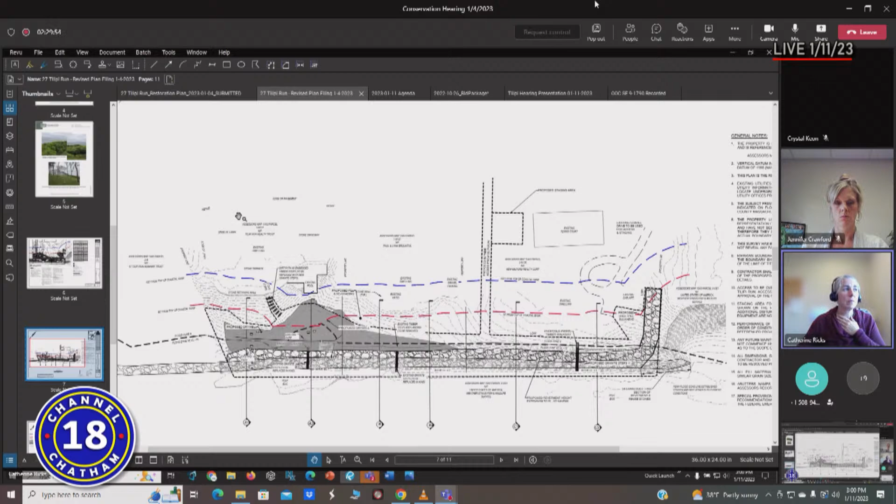Oh, okay. Back in here describing the lot over here, we did have some, and we can make sure that we clean that up. Yeah, okay, good. And that'll take care of all of my concerns there. Okay. All right, so are we there yet? I think we're there. When will you begin? As soon as this meeting ends?

So, on that bulkhead, on the return, we'd really like to get moving as soon as we can. We have reached out to contractors, so we do have some things lined up. We are in communication with the Wildlife Refuge consistently throughout this process. They know that it is going on, so we would like to, and you know this is coming, because of the situation, we'd really like to be on the January 25th meeting because we don't want to wait another month to really start this process. In this particular case, I understand. Yeah, I understand.

We're just gonna have to ask for overtime, that's all. Double time. Double time of zero is pretty much zero. Yeah.

All right, so I guess we're ready. So this is for the next work session, I guess. The 25th? I'll move that we continue 27 Tilipi Run to the next work session on January 25th, 2023 for an order of conditions. Second. Roll call vote. Bob, aye. Janet, aye. Aaron, aye. Elise, aye. Cheryl, aye. And I vote aye as well.

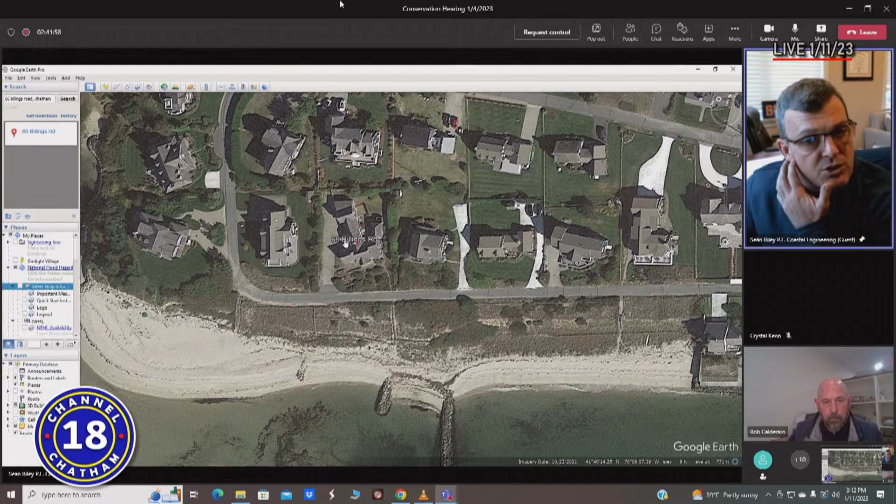Good afternoon. For the record, Sean Riley with Coastal Engineering Company. Along with me today is Rob Calderon, the landscape architect with Polhemus Savery DaSilva. The property is located at 66 Billings Road, on the south side of Chatham. Can everybody see my screen? Yes. The resource areas adjacent to this property are coastal beach, land under ocean, coastal dune that comes up pretty close to Billings Road, and the houses on the opposite side of Billings Road, with a velocity zone just skirting into the front edge of the property.

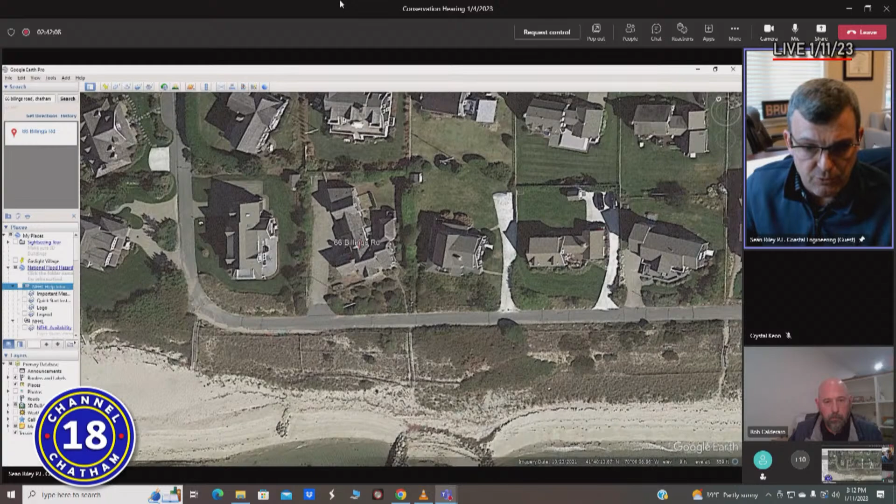I'll switch over to the site plan. On the site plan, with the existing conditions, 50 feet from the coastal dune. This is the edge of the roadway, edge of the mapped coastal dune. So 50 feet and 100 feet from the coastal dune. We've got an existing 3-bedroom dwelling, gravel driveway with a large paved apron out front that abuts Billings Road. The existing sewage disposal system is located under the driveway within the 50 to 100 foot buffer.

The proposal before you is to raze the existing structure and replace it with a new structure. We do have to go to the zoning board of appeals, so we'll be looking for a letter from the commission, hopefully in support that this project could be conditioned for approval, and then to come back afterwards and close out the project. We've already been to the Board of Health and received approval for the innovative alternative system for a 4-bedroom dwelling. Moving over to the proposed plan, the new system would be located entirely outside of the buffer zone in this area up here, shown in green.

Again, the velocity zone is down in this area here. The house itself is completely out of the flood zone. It's in a shaded X zone, which is the 500-year mapped zone. Pulling the house back, we have a net reduction in the 0 to 50 foot buffer of 70 square feet and a net reduction in the 50 to 100 foot buffer of 199 square feet for a total reduction of 269 square feet within those zones.

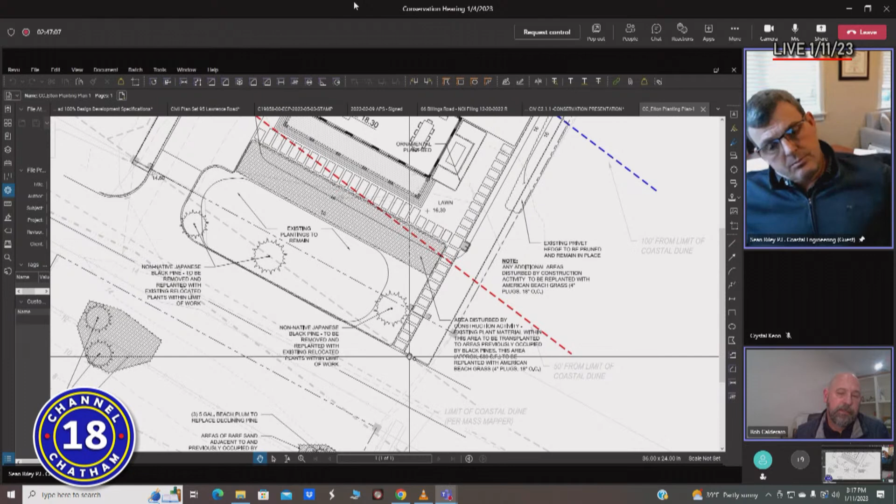Any areas that are left disturbed would then be planted with American beach grass, as well as a stretch along the walkway from the east to the west in front of the house as well.

On the opposite side of the street, if you've been out to the site, from a native landscape point of view, it's relatively beautiful, and there's a fair amount of bare spots that we'd like to address, especially around the existing non-native black pines that are there as well. One, which I'd call at the end of its life, right along the walkway that goes down along the southeast piece. That small one there is in decline. We'd like to remove that, as well as the 3 others indicated on this plan, and replace those with beach plum, 3-gallon or 5-gallon, 3 of them in this area here, and then beach grass on the other side.

Otherwise, it's a relatively simple planting plan. We're trying to minimize our disturbances as much as possible, and would be happy to take any questions. Okay, thank you. So the only thing you'll be planting new will be beach grass and beach plum. And beach plum. Okay. And it's also an ornamental plant, Ed. It doesn't say what it is. Right, there's that. And he's putting in a California privet in place of the one privet, not the other. Yeah, got it. Right, exactly.

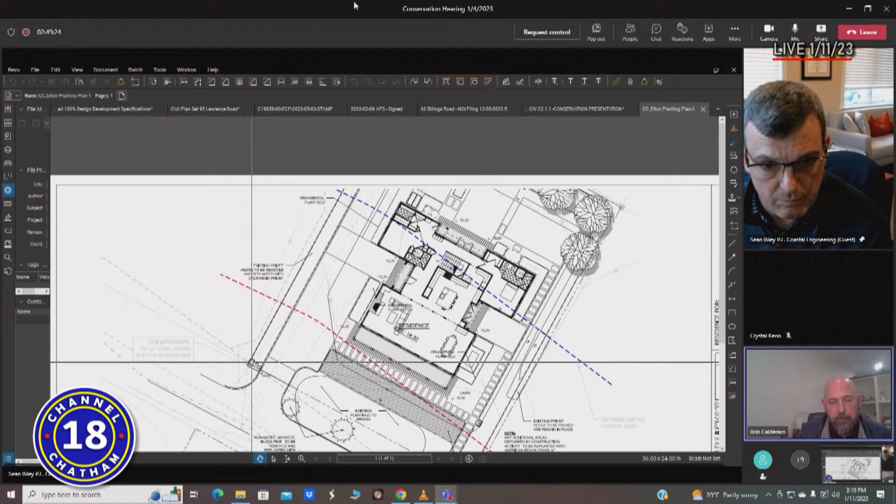Well, I guess I'm just going to launch into the California privet thing. I know that it is not listed in Massachusetts as an invasive species, although it is listed as such in many other states, and it's listed as a noxious weed in 46 states. So I'm just wondering why you're proposing California privet, which, as I understand it, actually originally was an Asian privet. I don't know why it's called California now.

Well, the reason why is because it's existing all the way up that property line. Really, we're going to basically contain or maintain that similar hedge. We'd be happy to look at alternatives if that would please the board. Yeah, I think we have in the past asked for a different hedge, and yes, I think I can speak for most people up here that we would like to have a substitute. California privet really should be on Massachusetts' list of invasive species. I'm not sure why it isn't, but it is almost everywhere else.

Along that line, why aren't they removing the privet on the other side of the property? I'll let you take over now. No, I just figured if we're dealing with privet, yeah. Go for it. Go ahead, and I'm just going to step back for a little while. Good question. So the privet on the other side, why isn't that being replaced?

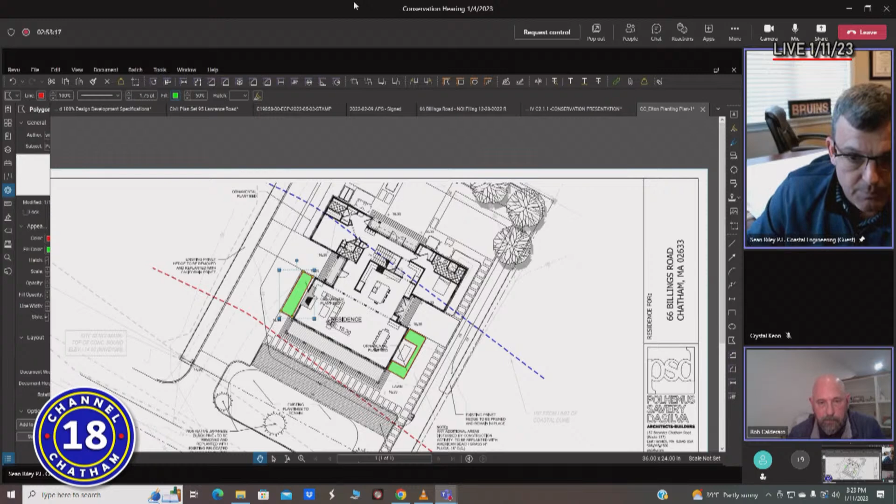I'm also curious why they need quite so much driveway. It's quite a bit of the property. I guess, for Karen's question, Sean, would you like to say anything about that? Yeah, actually, Rob has the design of the driveway, so I'm assuming that he's got two parallel spaces. Let me just jump back to the other plan. Sean, you're exactly right. What we're trying to do here is provide parking on site while also providing an opportunity for people to pass. There's no street parking here whatsoever. Right. It's what the client has requested.

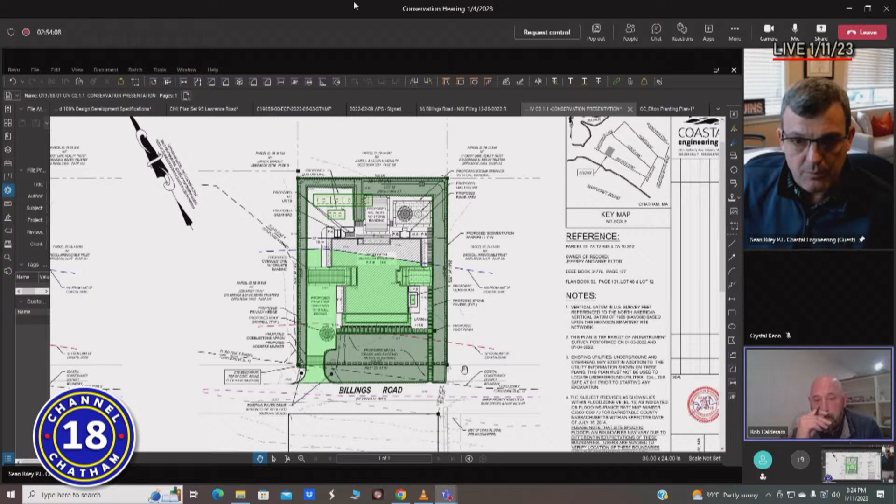And as Sean mentioned, from a hardscape point of view, within, I believe, both the 100 and the 50, we are at a reduction. Sean, is that correct? Yeah, that's correct. So essentially it'd be two parallel spots here and then two spots up in here. So room for 4 cars. So again, just to take it off of Billings Road and bring it back onto the property. Either that or they're going to be parking out on the street. And there really is no street. There's barely enough room for 2 cars to pass, let alone have parking on the street.

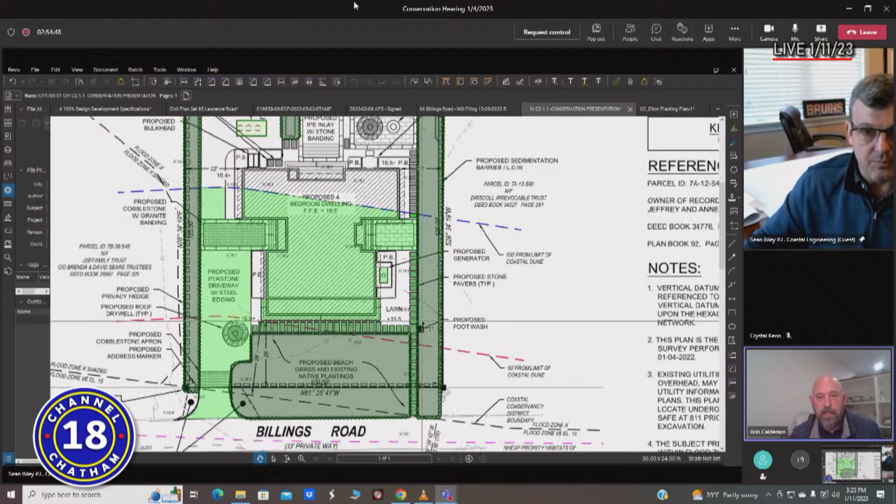Okay. So I also noticed you have a rinse station, but you also have a foot wash. Why do you need both of those? Well, the foot wash is really just a spigot so you can wash your feet when you come off the beach, so people are not walking off the beach and into the front of the house with sand on their feet. The rinse station is a different use pretty much. That's to wash the salt water off, and that's also outside of the buffer. Right. Right.

And your generator, is it against the house? It's pretty close. Because I just had one put in, so I know you have to be 5 feet from the house, and you have to be 25 feet from any property line.

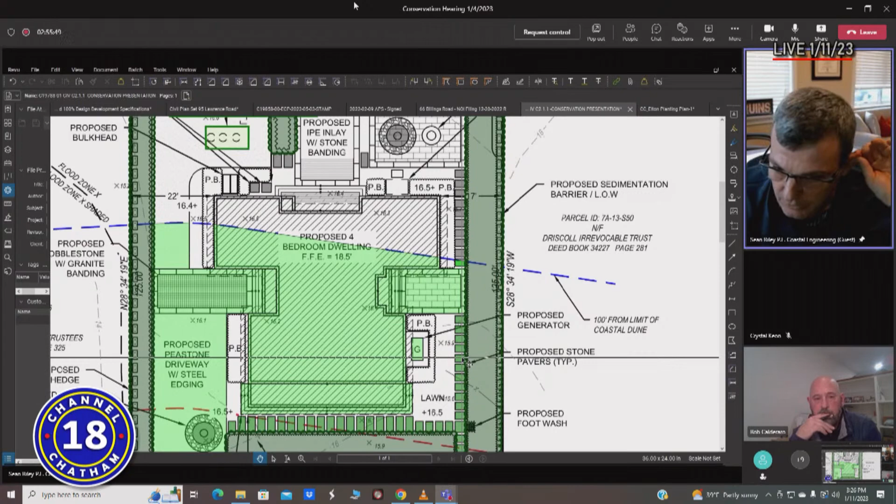So we meet all the building setbacks, and to be honest, I think the size we're showing is a little big. We do have the ability to be 5 feet from the building itself and still maintain the 25 feet. It's 15 feet from the property line in this district. Oh, it is? Yeah, this is an R20. Okay. I didn't realize there were different areas. Different zoning areas, yeah. Interesting, okay.

Somebody else can go. Is that it? Okay. For now, at least. Bob? I'll go. All right.

Yeah, so as a substitute for the privet, we've had winterberry on a lot of other properties that we've reviewed. And it provides food for wildlife, and it's very colorful in the fall into the early winter. So is that something that you can live with? It's something we can certainly present to the client. Something I could certainly live with.

Okay. And how about the east side within the 100 feet? Could you remove that area of privet and substitute it with winterberry as well? Again, that's something we will present to our client, but it's something we certainly will. Okay. And the lawn areas to the east of the building, there's that lawn area that's specified. Where are the other lawn areas? There's a little piece right in here. Can you see my screen?

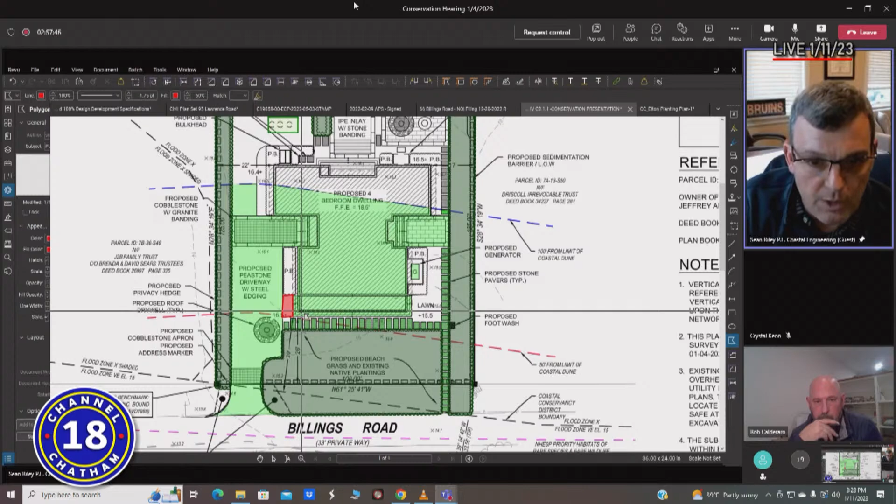Yeah, just this little piece to the left of the porch, the strip between the driveway there. Why would you bother? And that would be a fine fescue Cape Cod lawn. It's just so when you step off the front porch, you're not having to walk, you can walk out onto the driveway.

Okay, so all the lawn areas, the other lawn area should be labeled as well, correct? It is. Oh, well, yeah, it's this little pocket. Yeah. And so there'll be Cape Cod lawn, a fescue mix or what have you, and no permanent irrigation? Correct. Good.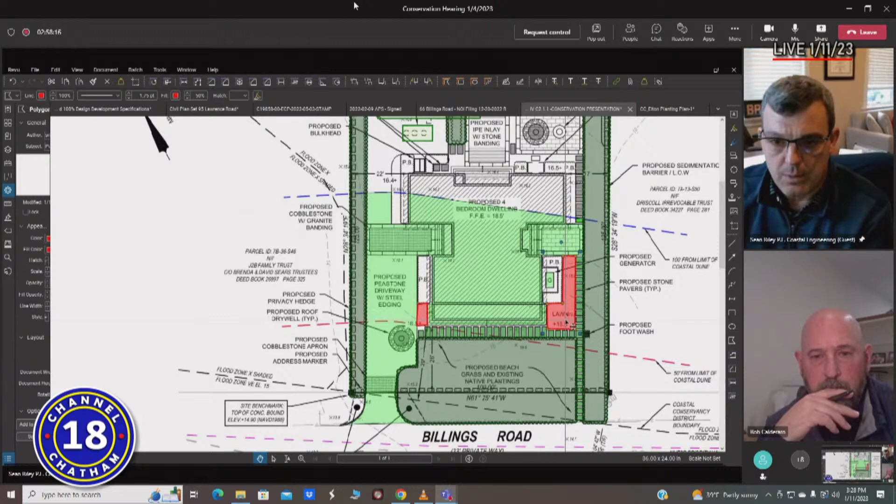The Japanese black pines out front by the road, on the building side of the road, those will be removed. And then I think there was some beach plum out by the walkway. Those will be transplanted into those areas. Is that the story? The beach plum that are up by the walkway will be used on the house side of the street where we have those 3 black pines.

Yes, okay. And then we'd be replacing the black pines that we're removing on the south side of the street with new beach plums and beach grass. And also filling in, if you've been out to the site, there is a fair amount of bare sand areas that we'd like to augment and bring up to the same appearance as the other areas. Right, I noticed a lot of voids in that bank. Could that be delineated on the plan as well, just to show that you're going to be planting beach grass in those areas?

We've called out those areas on the plan. Can you see my screen? Yes. So they're called out in these areas here. Just in those 2 areas, but I think along the whole bank there are some voids. I think some areas along the whole bank could use some beach grass as well. We can take a look at that and add those to the plan.

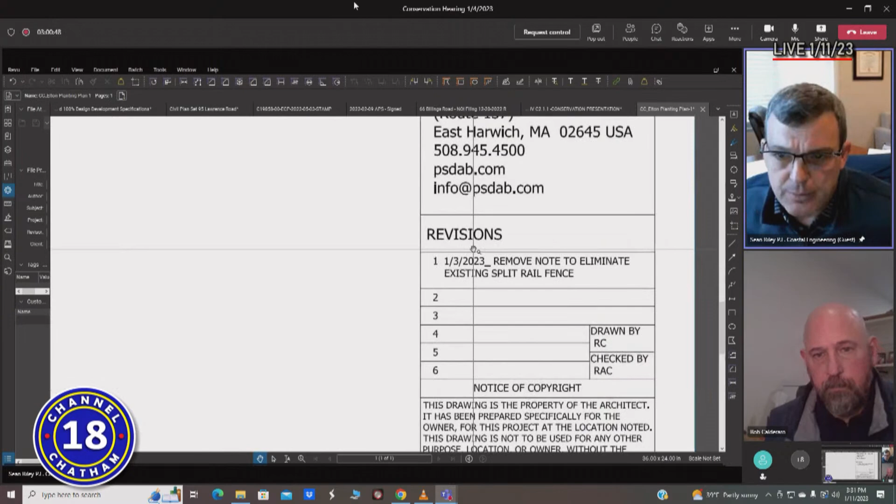Yep. Of that date, right? October 18th is the date of the plan, the revised plan. No, the revision is 1/3. Oh, I'm sorry, it's right up here. Yeah. So I have a 1/3 plan that the note says eliminate existing split rail fence.

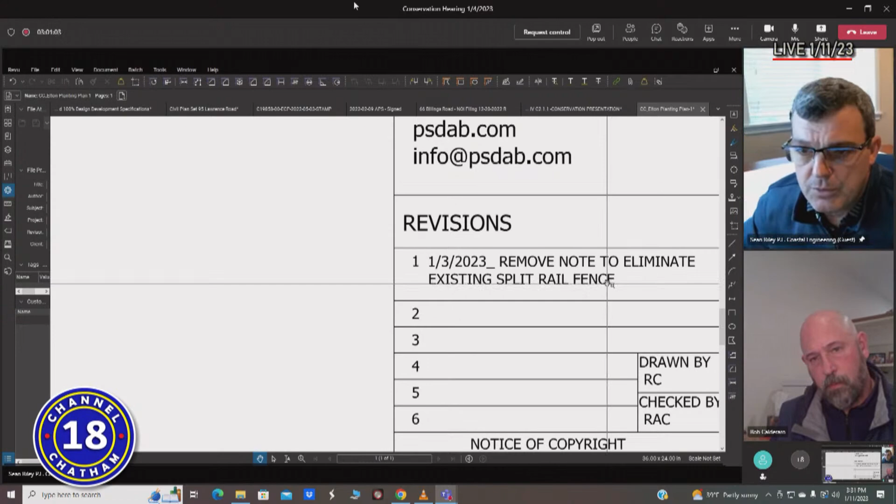Oh, remove the note to eliminate. Remove the note to eliminate. Oh, I see. It's a double negative. Okay, I got it. Yep, to eliminate. Yeah, you got it. Those always confuse me. No worries. We had 2 notes that indicated that we were going to remove the split rail fence, and those have been removed. The notes. See, okay.

But you won't be replacing the split rail fence, just going to leave it as is. That's correct. It's pretty long in the tooth, isn't it? What's the condition of that, Rob? Do you know? I've got a picture. It's pretty beat up, and it's almost like a safety issue at the moment. Flotsam and jetsam, I think, is what it's going to be pretty soon. I would think if you're going to upgrade the property, you'd want to upgrade that fence as well, or remove it.

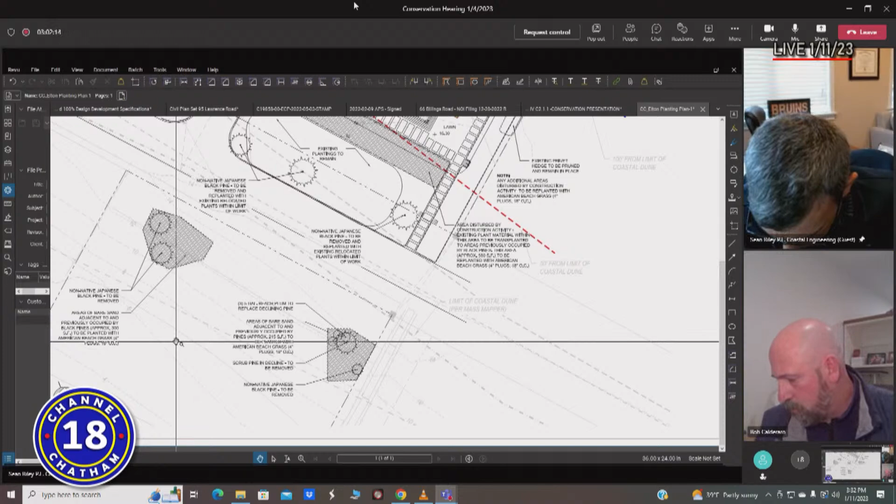Client has requested that we keep it. I don't see it being a problem for an upgrade to replace it as is. And the stairway leading down to the beach, that's going to remain as is? That's correct. Okay, that's all I had at the moment. Thank you, Rob.

Anyone else? I'm just going to note that, to think about that fence, as well as the proposed stepping stones that cross into the VE zone. And the fence is also in a VE zone. And as we know, storm intensity is only going to be increasing. So we generally don't allow structures in a VE zone. And I'm not sure how the paving, the stepping stones are to be secured, but that's a risk as well, of being dislodged.

So just to clarify for you, the VE zone is this line here. So all our paving is actually outside of the VE zone. But I do agree with you that the fence, we should take a look at and have a discussion with the client about the fence. Okay, so I was looking at it. Yeah, this is the VE line, this dashed line that comes down. Right there, okay, so it's staying, all right. Yep.

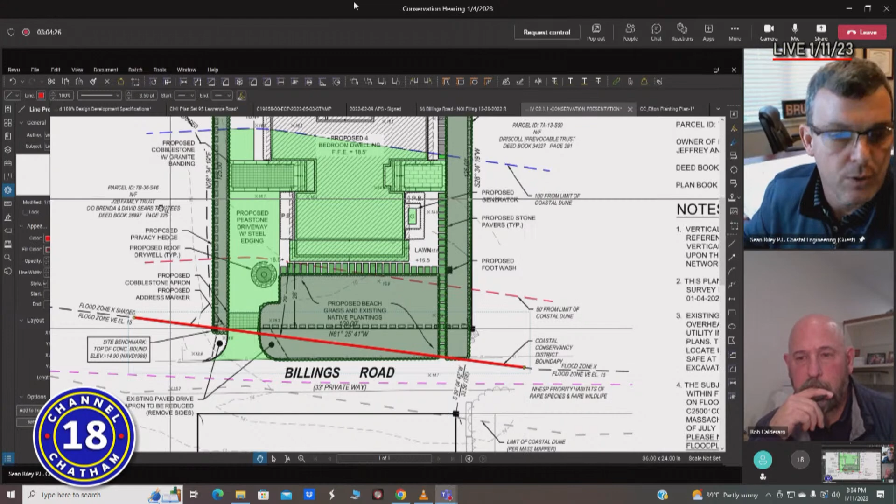Oh, no, I'm sorry, I'm still looking for where I saw the VE line. Well, let me see if I can jump over to, you saw it probably on my plan. Can you see this site plan? Yeah, there it is right here. Yep, okay. That is fine then. Yeah, I think it'd be great if you could think hard about removing that fence.

Yeah, we can have a tough discussion with the client. I think the reason why they've kept it at this point is to be consistent down the road. If you look up and down the road, that split rail fence really just kind of goes in both directions. I agree, and aesthetically, I can see why they'd want it, but things are changing. I think it may also serve a purpose to keep people from just accessing the beach, because I think they terminate at the points of access, other than people just walking across the property to get down to the beach at any given point.

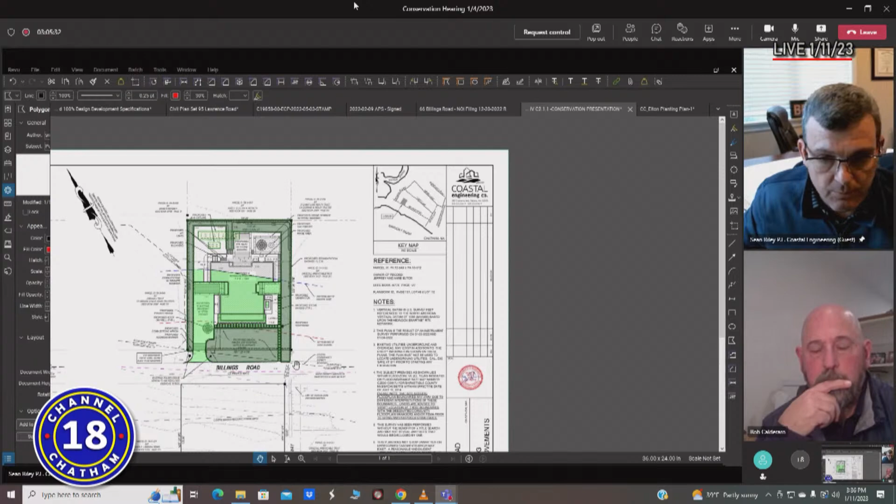Let me just jump back to, you've got these access points that come down to the water. So it's really just directing people to those points. And that's where that fence is, along this edge. Understood. You just don't want to be putting boat hazards into the water from storm activity. We could look at something that would be a little bit more durable or less of a potential for waterborne debris. Maybe just a short iron or something that's not going to float and become a hazard. We can have that discussion with the client.

Yeah, good. The only thing that occurs to me here, from my perspective, is that you are removing 6 admittedly invasive trees, but nevertheless, that's a fair amount of biomass that you're removing that probably provides some sort of habitat.

And when I couple that with the fact that I don't really know how many beach plums are being added, at the very least, could we know how many beach plums are being put in to essentially replace those trees? And could we have as many as possible, in order to sort of make up for the loss of the biomass?

We could take a look at that. Yeah, just to push it to whatever you can push it to. Mm-hmm. And also just sort of give us an idea where they're going, because at certificate of completion time, the agent would need to have an idea of how to figure out whether what was promised was done. Understood. So that's another reason to have the number of beach plums, so they can just dutifully count them all, and they would know.

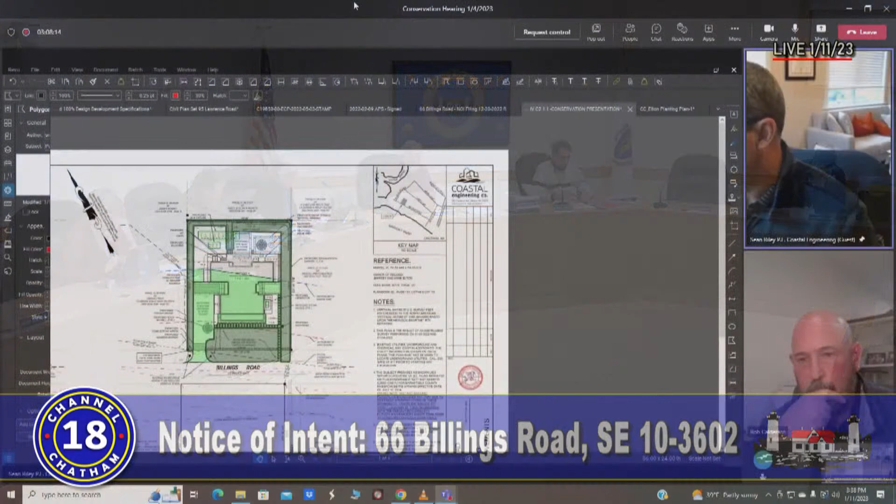Yeah, so why don't we do this? Why don't we continue to before the ZBA hearing, because it's going to be on the 23rd of February. So we can continue to a hearing just before that to review this so that we finalize this, so that we don't have to have several, and if we have to make any final changes, we can do that right after the ZBA hearing. Right, that sounds efficient.

So what are we looking at? The second week of February? Is that February 8th? Do we have a hearing? Yes. Our hearings now are the first and second Wednesdays. First and third Wednesdays of the month? First and second. We've changed things up a little bit. We still have the third Wednesday off. Our work sessions now are on the fourth Wednesdays. Okay. So whichever you prefer, either the first or the 8th would work for us. If you give us the option, we'll take the 8th. Okay.

Will someone make a motion? Okay, I'll make a motion that we continue 66 Billings Road to February 8th, 2023. Second. Roll call vote, Janet. Aye. Karen. Aye. Elise. Aye. Bob. Aye. And I vote aye. Thank you all for your input. Thank you. We will see you.

I'll take over, yeah, okay. If we need it. Mr. Chairman, can we take the certificate of compliance next? Dave's been sitting here for a while, and he's got to go at 4. Okay, sure. So next on the agenda, out of order, would be 125 Stage Harbor Road, Golden Orchard. Really doesn't matter, Paul, because I've got 2 NOIs. Oh, you do? Okay. All right. Sorry, I didn't know that, David, so I apologize. So never mind.

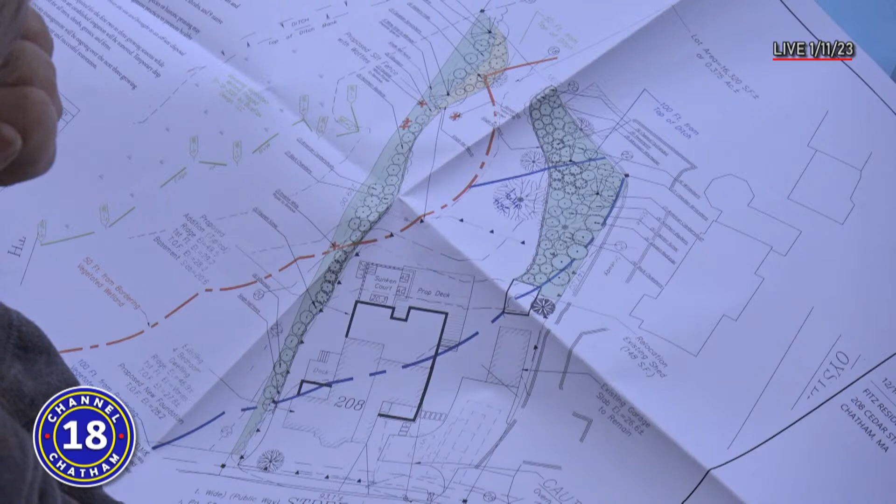That's all I had. Thank you. Thank you, Rob. I just have a quick question. This does seem to be a very straightforward plan. Is there a plan to add any paving material for the access to the driveway, to the garage? Right now, it's just lawn. We weren't instructed as to any new surfaces, so I believe it's just going to be backfilled and hardened off, and they might put some shell down, but we weren't instructed to show paving for that area.

Okay. This will all get dug up again when the sewer is available. No, got the trees. Okay, I'm good, thank you. All right, well, okay. So you're proposing a split rail fence, a very long split rail fence along both areas of mitigation on the left side and the right side. Is that the whole way from the back of the property?

We are, and I believe that was done in anticipation of the requirements in the new regulations. But similarly to what we discussed at 299 Cranberry Lane, there is a lot of woody vegetation going back in here, so it's not like grassland or meadow directly abutting lawn area. So I feel a little bit like that split rail fence is redundant, but I think it was put on the plan to meet those regulations.

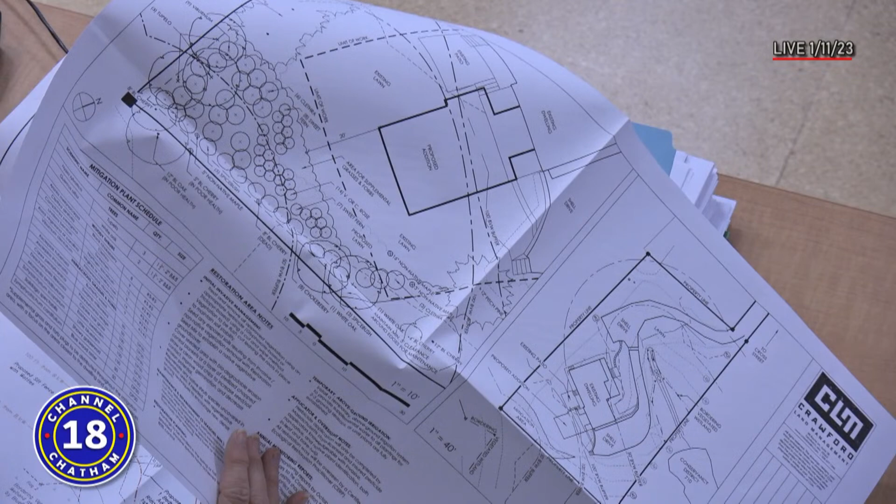It basically splits the 100-foot buffer from both wetlands, the northerly ditch and the southerly Old Cranberry Bog, that impacts a lot of properties on Harding Lane to the south of us. This is the northern side of that wetland. The addition is proposed on the back side of the house with existing lawn area, and the net increase is 968 square feet. That's the addition, as well as a window well to provide light access that you saw in a previous application, and a retaining wall that's required to minimize the amount of fill on that side.

I apologize. Crawford Land Management is also on the line to talk about the mitigation plan for this project. I don't believe this has to go to ZBA. It's a conforming lot in the R40 zoning district. It's connected to town sewer, so there's no Board of Health issues. So this is really the only board permit we need from the town of Chatham. So if there's any questions on the site plan, I'd be happy to answer. Otherwise, yeah, let's go ahead and hear from the other side.

Good afternoon, Nick Crawford, Crawford Land Management. Overall, it's a pretty straightforward proposal. We're offering 1,900 square feet of invasive species management. We're evening out the lawn edge by converting some existing lawn to naturalized area and reclaiming a little bit of area that's currently naturally vegetated. It ends up getting the lawn area further away from the 50-foot buffer, but results in the same amount of lawn in the end.

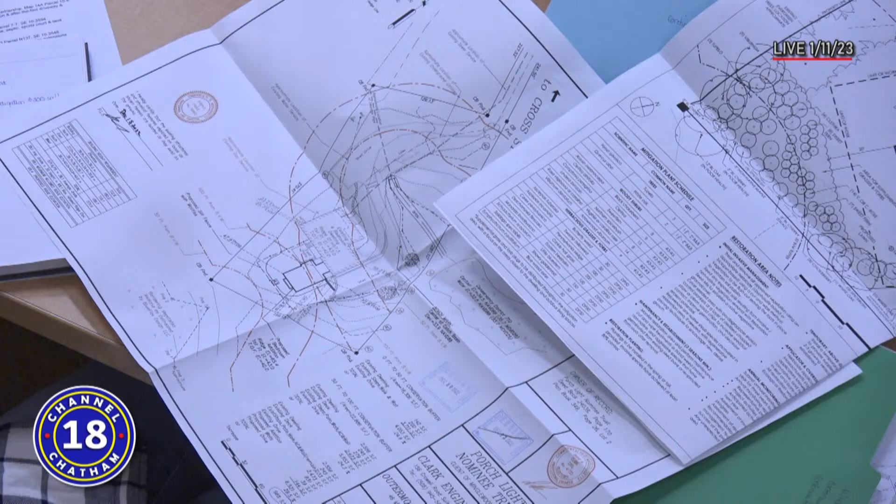I don't think I have any of that. So the area on your site plan shown as planting bed, maybe that... Planting bed.

I don't see it on my site plan. Oh, I see it now, yeah. I couldn't tell what the plants were. That's probably this time of year, too, yeah. I asked this question because I'm still trying to figure out how long mitigation lasts before it disappears from memory, let alone being there to the eye.

And this is part of the reason why we undertook our revision to the regulations. According to the assessor's card on this, the additions were put on in 2007. Time flies. So that was one year into your no disturb zone and mitigation requirements. So I don't know. The last revision, you mean? I don't think there was a policy on how much mitigation was going to be required at that time. I know the major revision to the bylaw, your regulations and the bylaw, was 2006, when the NDZ came in.

Wait a minute, of course I wasn't around then, but you're saying that the NDZ came into play around that time frame? Around 2006, yeah. Okay, actually, I thought it pre-existed that. That's good to know. All right.

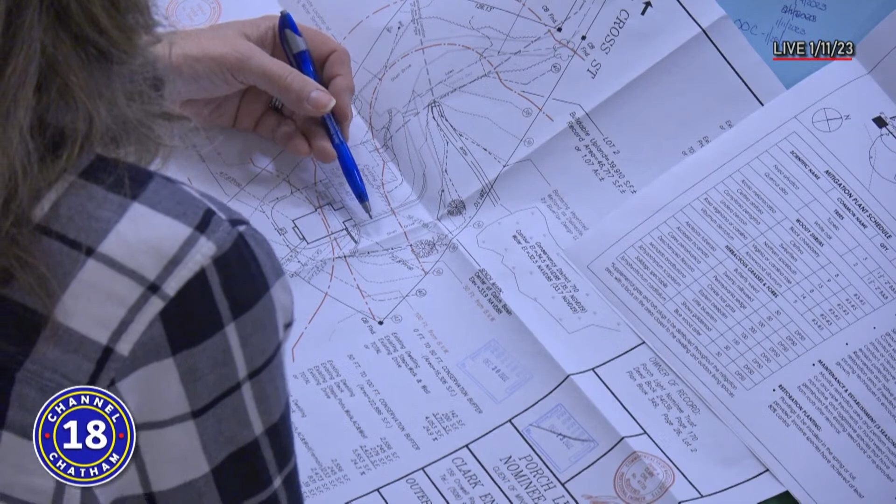But on the side that's not that little slice where the two retaining walls are meeting, where it's heading out towards the stairs, I thought that looked a little more planted, so I was just curious how that's going to look. It kind of seems like it wasn't needed, is sort of why I was asking. Okay, I don't have an answer. But I can get you an answer, because we don't have a file number for this one either. That's right. That's a problem.

I have a question: is there going to be a foundation planting for the addition? Probably, to cover up some concrete. I imagine there will be. And we can get you details on that too. Yeah, that'd be great. Of course, you know what we like there for foundation plants. Just read the regs. California privet. Yeah.

Anything else? Otherwise, I think it's a good mitigation plan. You're going to remove some lawn, and you're going to remove a lot of invasives, so I think it's a win as far as that goes. Okay. Anyone else? Okay, no one else. So you're going to work on a couple of things. The foundation plants, what else? A little clarification on what's going on adjacent to that new retaining wall.